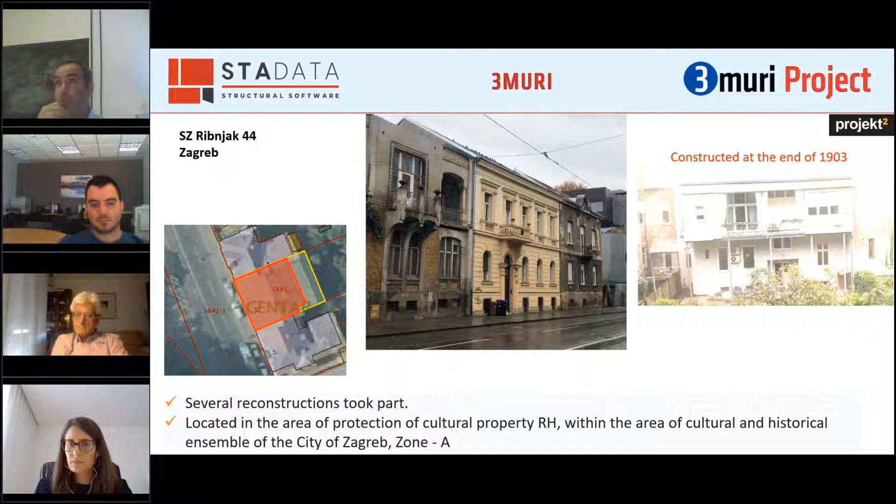The first picture shows the street facade, and the other picture shows the structure from the other side. What you can notice is that there were some reconstructions that took place, these being the steel columns that you can see in the picture.

This was very important because, as I already mentioned, there were several reconstructions and changes to the design of the building. We wanted to have the exact right geometry of the building in order for our model to be as realistic as the structure is.

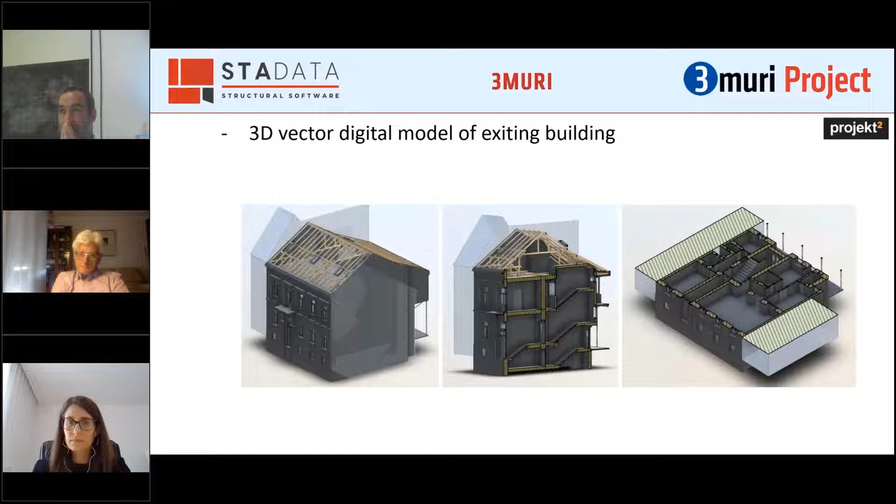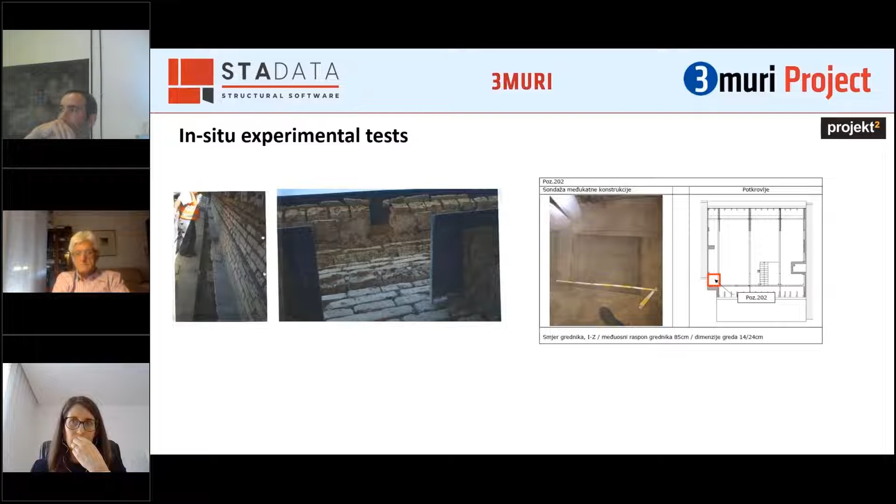As we know, masonry constructions can be made of various masonry elements, and in this specific case these were solid bricks. Also very important is the time of construction of the buildings, because we can connect this with the valid construction technical regulations of that time, and basically know what kind of design was done. During the in situ investigation, it was also necessary to determine the position and distance between the timber beams that were creating the slab of this structure.

The next step was a very detailed visual inspection and determination of the damage. This was done in high detail, and what we wanted to see was the direction of the cracks, the pattern of the cracks, the width of the cracks, because this was necessary so that when we did the modeling of the structure, we could compare whether we were getting similar damage as the building actually experienced after the earthquake that hit Zagreb in 2020.

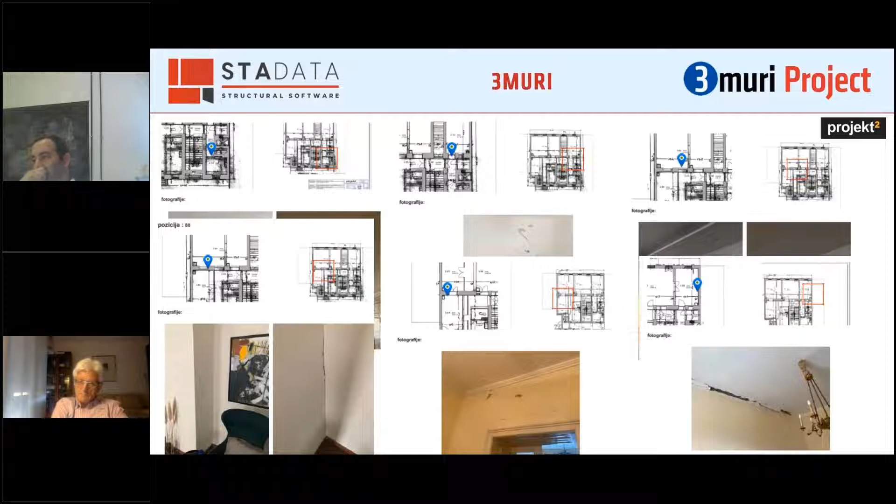Following this, a very detailed inspection marked all cracks on all levels. This is important because this structure was constructed in 1903, and the slabs were timber slabs, meaning we are dealing with flexible kind of slabs. So it was quite logical that the cracks at the connection of the walls and between the slab and the structural walls are a typical kind of damage for this kind of structure. We would say this was more than expected.

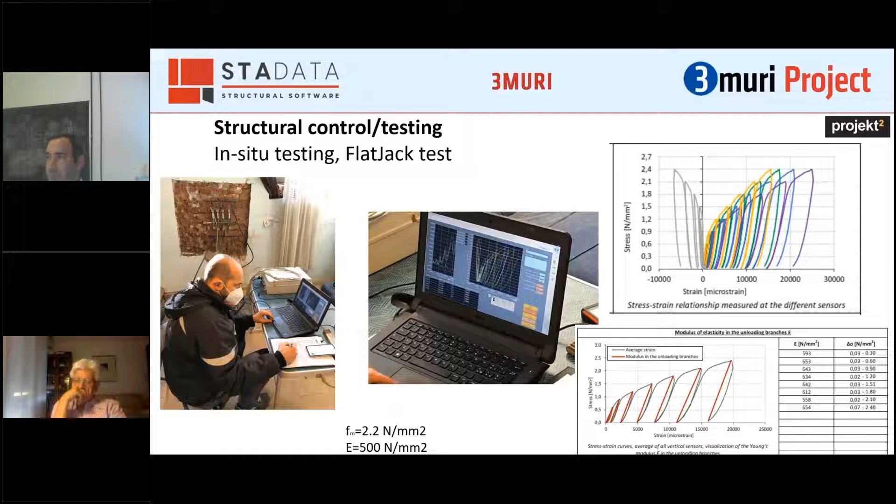The next step, for verification and validation of our model, was to determine the characteristics of the material. We conducted single and double flat jack tests, shown on this slide, to determine the compressive strength of masonry on one hand, and the modulus of elasticity on the other. The compressive strength of masonry is 2.2 megapascal, and the modulus of elasticity is only 500 megapascal. So we are dealing here with a very low quality of masonry.

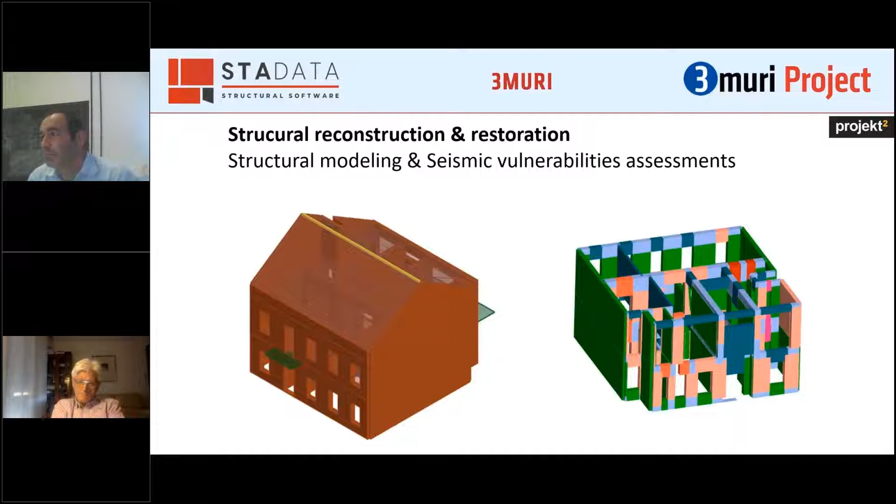So we chose 3Muri to conduct the numerical analysis and the seismic vulnerability assessment. You can see here the model conducted in 3Muri. First we conducted the modal analysis to determine the eigen frequency, which was very close to the result we obtained from the on-site investigation. This was the first thing that confirmed our model was done correctly. Then we conducted the pushover analysis in the X and Y directions, taking into account the PGA of the actual earthquake that hit Zagreb in 2020.

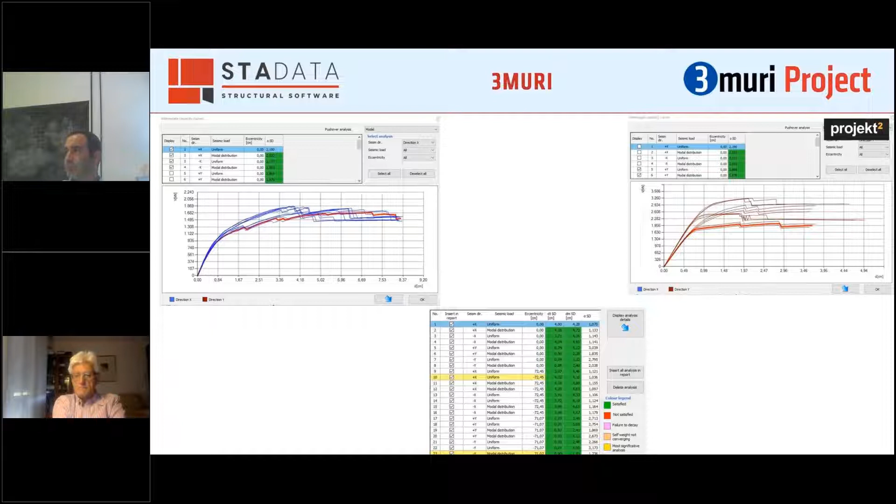However, we wanted to try and see what the results would be if we changed the strengthening method a bit. Again, we kept the FRCM and the steel frames, but we eliminated one of the steel frames from one of the walls.

What was interesting as well is that we said, let us change the slab and use concrete topping, even though we knew this should be prevented for the reconstruction of existing historical buildings, because the best solution would be to strengthen the structure with wooden planks and keep the behavior of the structure exposed to earthquake action as it was before.

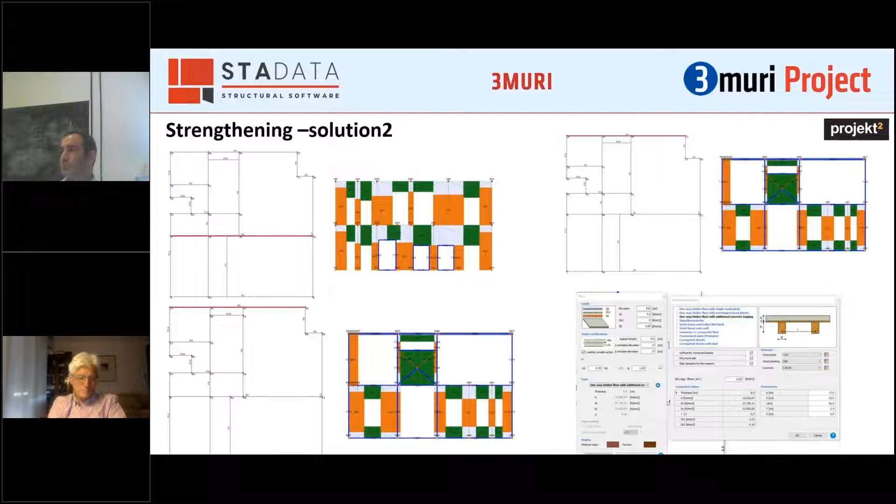So again, we conducted the pushover analysis in X and Y direction. In the lower part you can see that we wanted to compare and see how the implication of the strengthening method related to the original structure.

By comparing these two elements, we decided that the first solution was actually the better one, and that was our recommendation for strengthening the structure. We need to state that the strengthening was conducted for a return period corresponding to level 2 of the regulations.

At the moment, there are two projects being done: the project in Frankopanska Street and Georgicheva. The model is already conducted in 3Muri, and we will see what the next step will be. This is all from my side. Thank you very much for your attention.

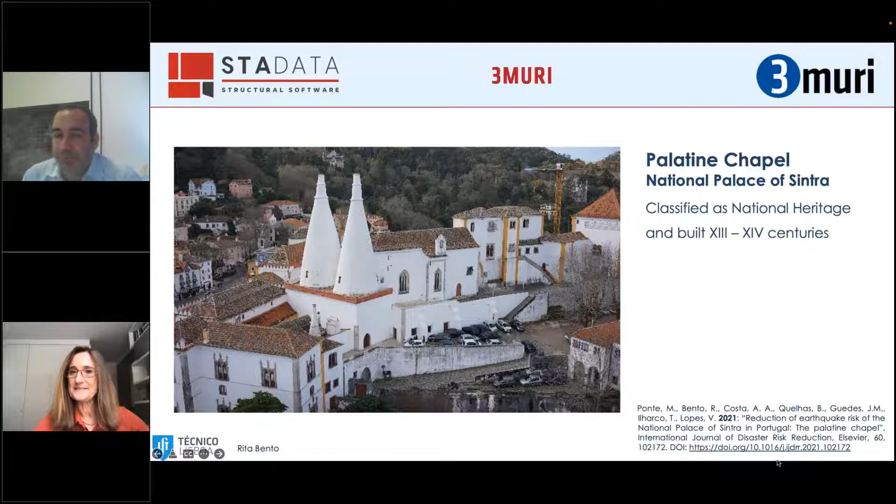I'm going to present this case study, the chapel from the National Palace of Sintra. The objective is to present an example of good practice in seismic risk reduction, comprising inspection and diagnosis, structural analysis, safety assessment, and the proposal of rehabilitation and strengthening interventions. These are basically the common main steps for the seismic assessment and retrofitting of this kind of structure.

The study starts with inspection and diagnosis, step number 1, through a visual inspection complemented with in situ tests. Then the results were used for construction and calibration of reliable numerical models, step number 2, as well as for the definition of rehabilitation actions. Then, after identifying the most vulnerable parts, step number 3, some strengthening techniques compatible with the building characteristics and importance are suggested.

So, starting with the description of my case study. It is a chapel. It presents a classic cross-plan shape composed of a nave, a transept, a choir and a chancel.

It was adapted along the years, and the main structural modification was the ampliation of this area, the presbytery area. We have here the main dimensions of the chapel from the plan side, but I'd like to highlight that the masonry walls are about 11 meters high.

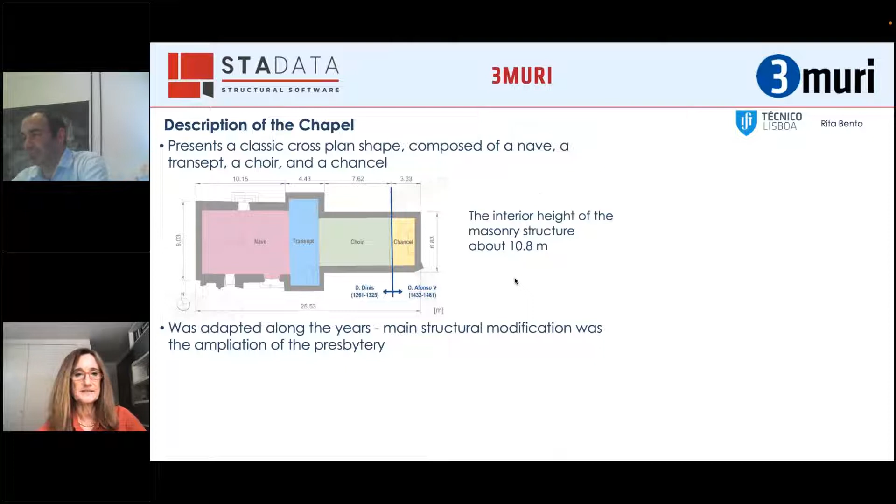So we have here some images of the interior of the wall. It contains mural paintings and a very delicate timber ceiling made of hardwood. The roof is of timber elements, supported on about 70 to 90 cm thick rubble stone masonry, with some stone works at the corners of the chapel.

You can see that there is a masonry arch which divides the space between the choir and the chancel, and it supports the ceiling of this latter space.

You can see that from the beginning there are, in fact, two different types. You can see from the image steel tie rods that were introduced in order to somehow avoid out-of-plane behavior of the walls. So looking now to the type of roof and the timber structures that you have, this figure presents the

structural configuration of the two main timber trusses that were supporting the ceiling and the roof of the nave. This is truss A1, and you can see this type of truss in the nave and transept, but in the choir and chancel you have the other type of truss, A3, with a different configuration, introduced later on. It was not in the chapel from the beginning.

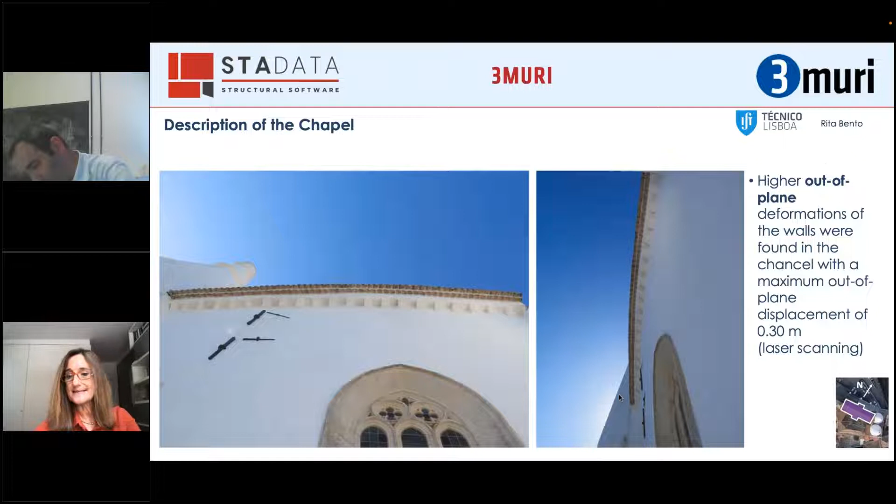In terms of inspection and diagnosis, we have performed different types of tests. In fact, we have two teams working in the chapel: IST from my university, so my team from University of Lisbon, and NCREP. NCREP is a private company, and for the chapel, it works together with the conservation and restoration team.

So my team has done tests for the geometrical characterization, laser scanning, and we have also support with the UAV. We have performed ground penetration radar tests, masonry sample collection, flat jack tests, and ambient vibration tests. And the NCREP team has been working with the timber structural elements characterization and study of the roof.

And the work done included the opening of survey windows from the outside, as you can see here, but also from the inside of the chapel.

So the geometrical survey, as I mentioned, of the entire chapel was performed using our equipment, with the laser scanner survey, with which it was possible to get a very impressive and important 3D definition of the geometry of the structure. As an example, we have here on the right side the accurate geometry that you can obtain with this, which was very important for the definition of the geometric model.

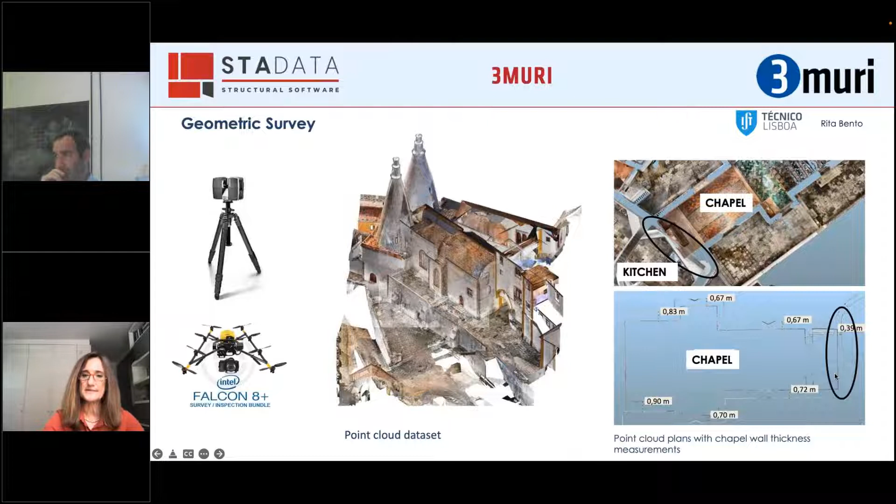Just see, for instance, the wall which is the connection between the chapel and the kitchen. It has a thickness which varies along its width, and this was only possible to get with this type of survey. So with the point cloud dataset, we also...

developed an HBIM model where we include all the information that we obtained for the chapel, not only from the inspection but also from the numerical studies. With this, we can very easily get horizontal and vertical sections, which will be very useful, mainly in future interventions of the chapel.

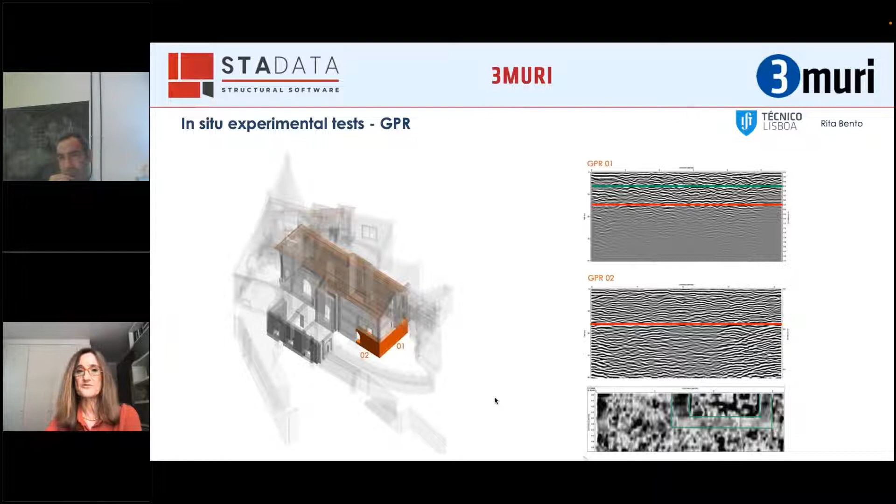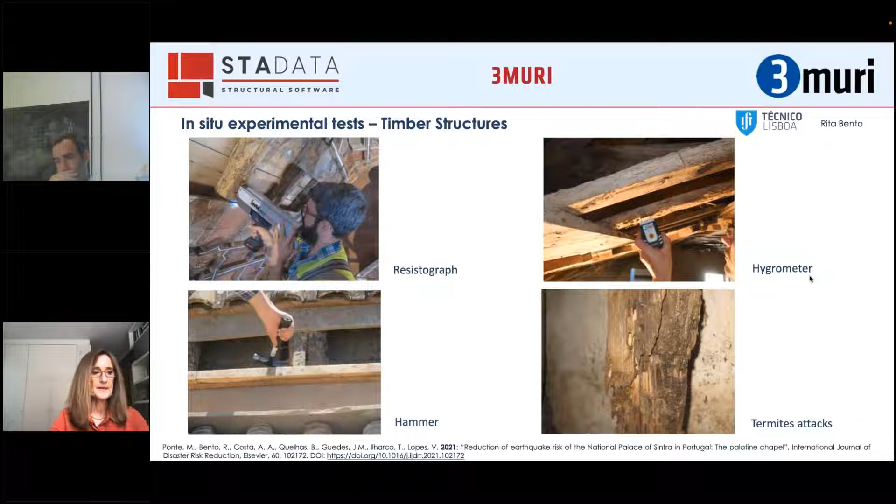This is the type of work that had been developed for the characterization of the timber structure. Non-destructive equipment was used, as you can see from these images, and it was possible to conclude that the major damage on the timber elements were related to termite attacks. The identification of the type and location of these attacks was fundamental for the definition of the final retrofitting of the ceiling and the roof.

Moving now to the seismic performance assessment. It was developed with 3Muri, in which the in-plane and out-of-plane behavior were studied through nonlinear analysis. The chapel is this structure in the middle. It was very important to account for the boundary conditions of this case study.

The calibration of the model based on dynamic characteristics identified with the in situ ambient vibration tests was one of the most difficult tasks for the seismic assessment of the chapel. To obtain the correct dynamic characteristics, it was necessary to model the total adjacent buildings. We started with some parts of the adjacent buildings, but it was not possible to accomplish the dynamic characterizations obtained in situ. So it was really challenging to get the final numerical modeling.

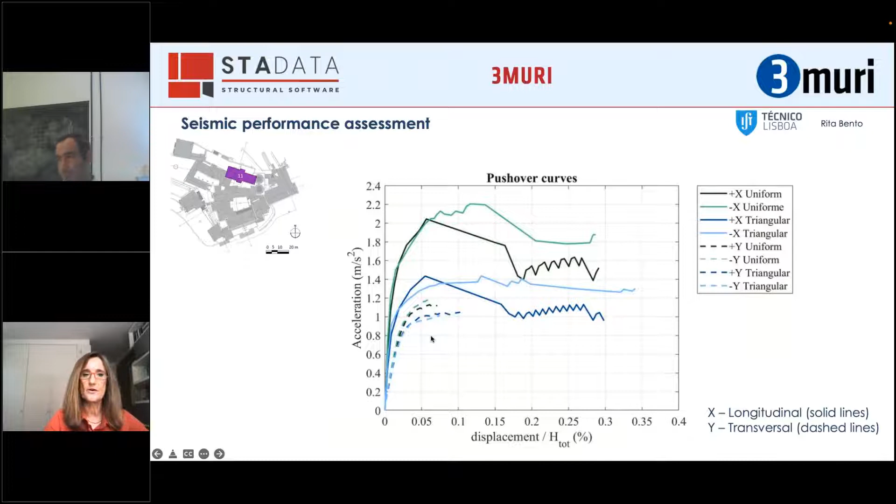So for this longitudinal direction, the effect of the other buildings was very important. For the transversal direction, it was not like this, and you can see for the y direction a completely different behavior, with much lower values of maximum capacity in terms of shear, maximum resistance, and much smaller capacity of deformation of the structure.

After performing and obtaining these pushover curves, the safety assessment of the in-plane behavior of the chapel was carried out following the recommendations of Part 1 and Part 3 of Eurocode 8, and of course the Portuguese National Annex, and we realized that the safety was not satisfied in terms of the global behavior of the chapel.

For the out-of-plane behavior, we considered nonlinear kinematic analysis performed according to the macro block modeling approach, using a tool in the 3Muri program. Here it represents all the mechanisms studied, a total of 8 different mechanisms for this case study.

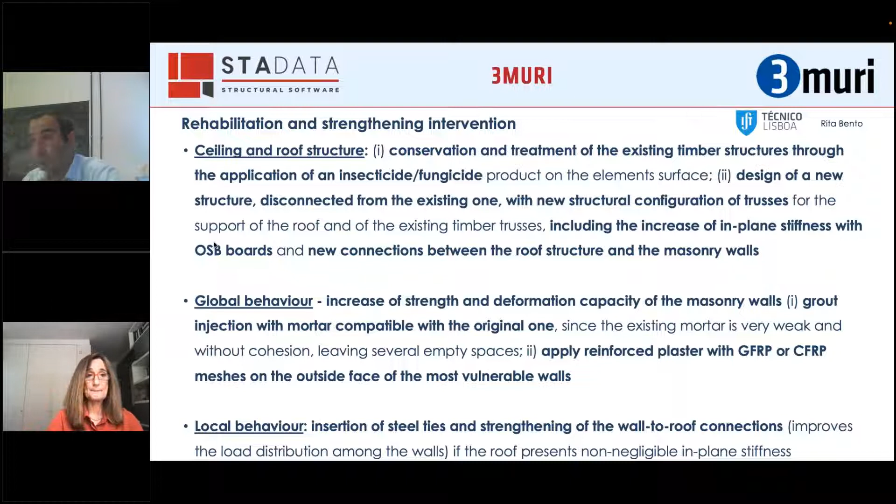Based on these results, some different rehabilitation and strengthening interventions have been proposed for the chapel, for the ceiling and roof structures, considering different types of solutions, such as applying insecticide or fungicide on the timber structures that have been attacked by these termites.

We have also considered some new structures disconnected from the existing one in order to improve the behavior of the roof, including some OSB boards to increase the in-plane stiffness of these structures, and new connections between the roof structures and masonry walls, which are rather important also to improve the local behavior of the chapel.

For the global behavior, in order to increase the strength and deformation capacity of the walls, we proposed grout injection with mortar, which has to be compatible with the original one. In some of the walls, we also proposed applying reinforced plaster with FRP meshes, only from the outside of the walls due to the very rich interior of the chapel, applied on the most vulnerable walls.

For local behavior, besides improving the connections between the roof and the masonry, some new steel ties were also proposed. So let's start very briefly with the intervention of the roof structure.

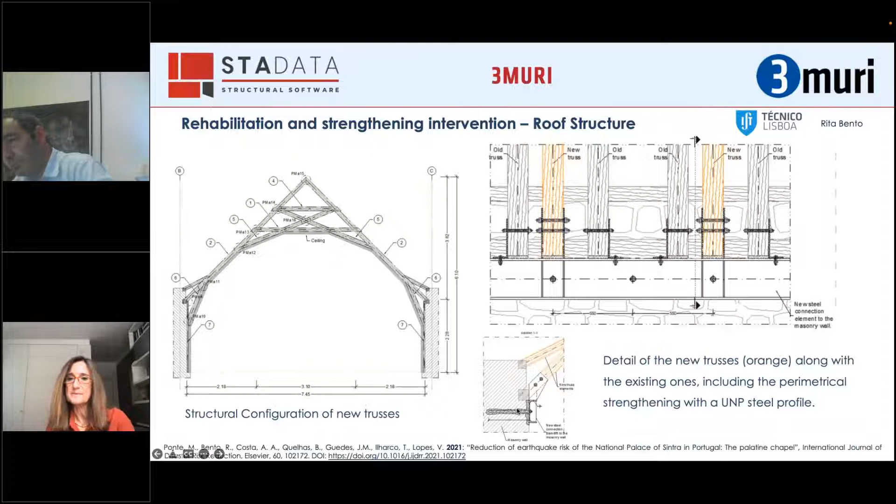So what was proposed is to have some new trusses, identified in orange in this plan view, along with the existing ones, and this is the configuration of the new trusses proposed for this retrofitting. You can see how these new trusses are connected with masonry, using this UNP steel profile in order to improve the connection with the masonry walls.

But of course, to have a reliable numerical model with this retrofitted masonry, it was necessary to understand how these solutions would improve the strength capacity and deformation capacity of the wall. We had no information about that.

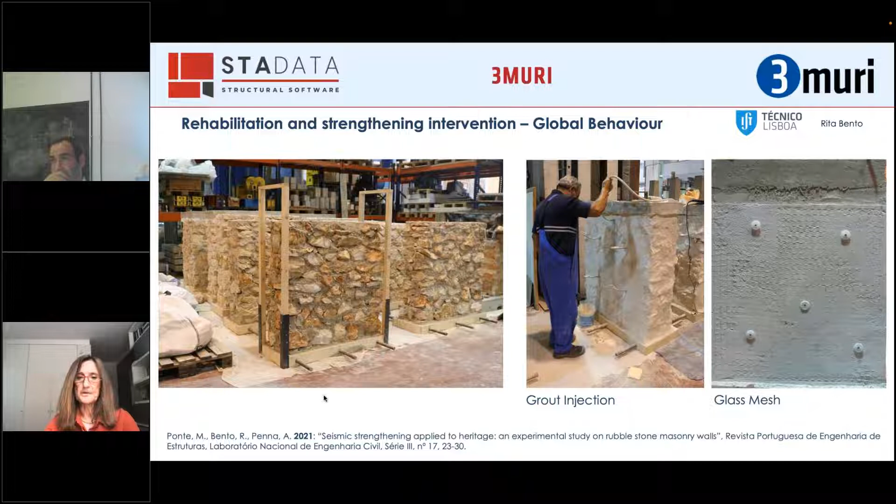So we decided to do laboratory tests for different types of retrofitting - only with grout injection, and different types of meshes, or only meshes - and we obtained results that we then used in our numerical modeling. The results of these preliminary laboratory tests have already been published, and we hope very soon to have another publication with much more results of this study.

Basically that's all - just to highlight the importance of these studies, the importance of the first step related to inspection and diagnosis activities, crucial for then calibrating our numerical models. These, together with the structural safety assessment, are the only way you can identify the most vulnerable parts of the structure, and then propose the rehabilitation and strengthening intervention.

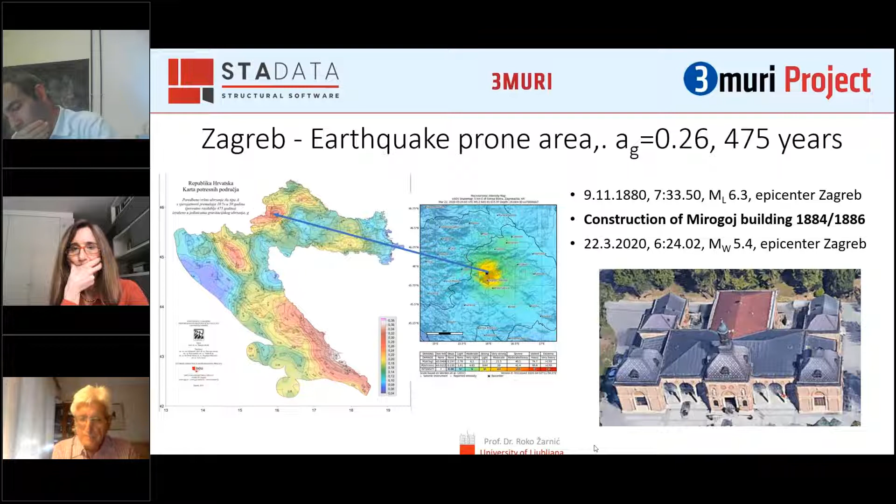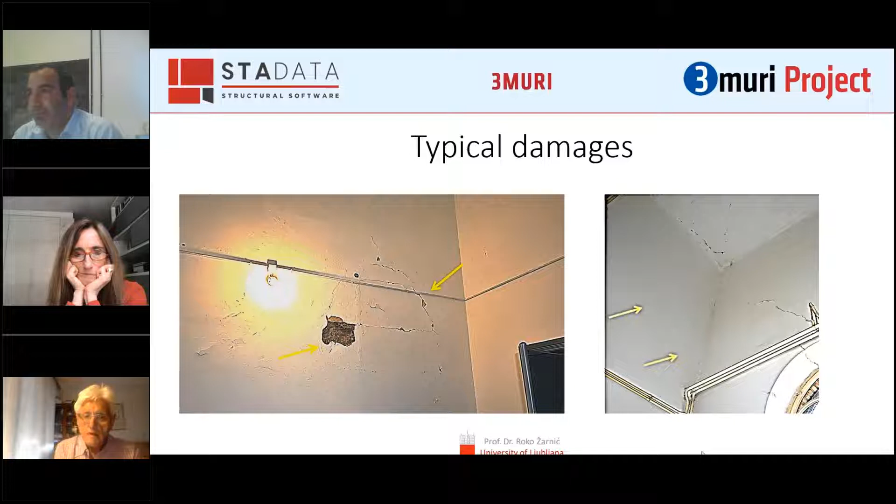We also have the digital survey of this building, but very, very good documentation from the original building exists: 1886 documentation, and also the design of enlargement in 1913 were available, as well as the last one from 1993, which was a very radical strengthening by putting in reinforced concrete slabs. Very, very good architectural drawings were available, so we could make a model just based on this data.

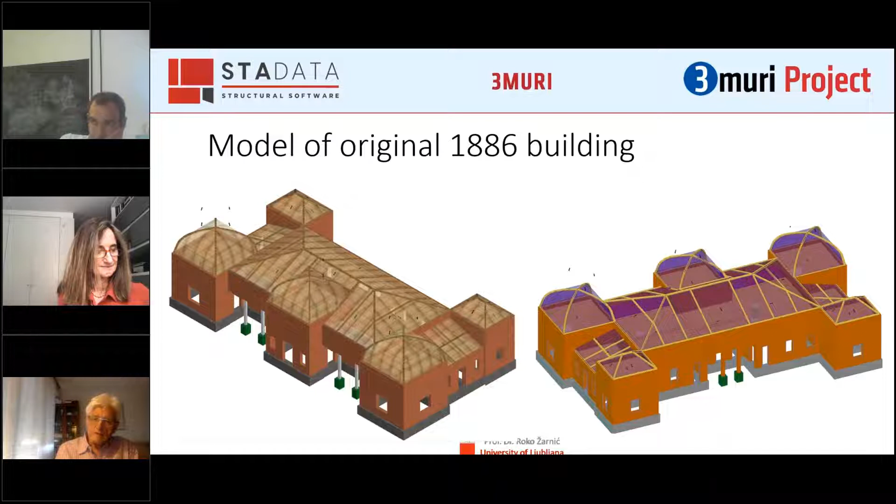After the First World War, they added the part you see in a different color, and that is today's current situation with reinforced concrete slabs and beams. But we are also going to make an intermediate system analysis where the configuration of walls is the same, but with only wooden floors. So we'll have actually three models, plus one from 1934, where they removed some walls and then added them again. It's quite an interesting game to play with.

Currently, I cannot show you the results because the site investigations are in progress. But from the first information, the masonry used in 1886 was of far higher quality than the one added 30-40 years later. That's why I didn't want to make any calculation yet, because there's such a big difference — we have to find it out, and next time I hope I can deliver you more information. But okay, what we learned from this: some challenges.

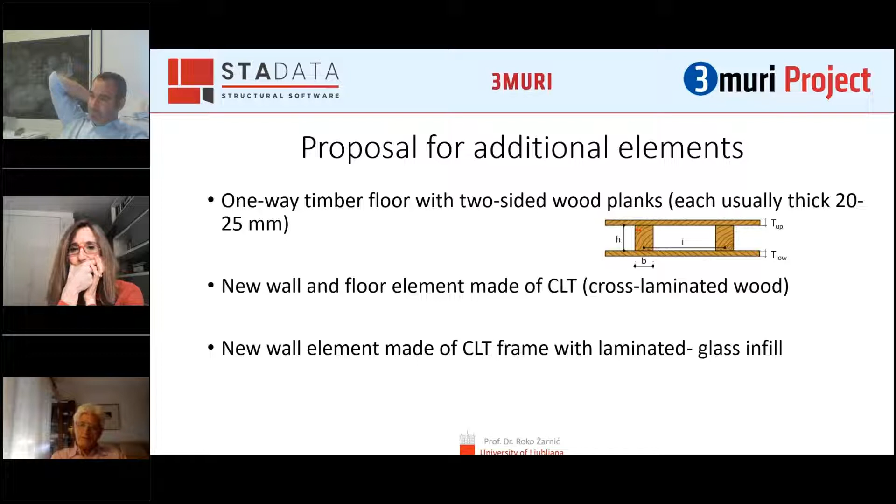These two systems could be very well used, especially when you need to replace inner partition walls and are limited in dimension. Why? We found that 3-ply CLT, typically 10 centimeters, has the load-bearing capacity of a quite good masonry wall of 30 or even more centimeters. Technically it's very easy, and if needed I have quite a lot of data. We did testing for 15 years on this.

So in this reference, some things are referred to, and I would be happy if we can work on this. The recent one was published last year, in 2020. It's an element which can be very useful when we need to open some part in a facade but keep it load bearing, since the envelopes and hysteretic curves are very similar to those of masonry, but with much higher ductility. I think it could be worthwhile to think about this initiative.

I was talking with Sergio Lagomarsino, because we've been together on one of the EU projects, Perpetuate. He said he would come to me with this - I'm waiting for him. It could be especially useful in Zagreb, where there are many buildings in the city center with damaged partition walls. People are not happy to have some structural thing from the basement up, but they could accept something like CLT. So maybe in future this could be a challenge.

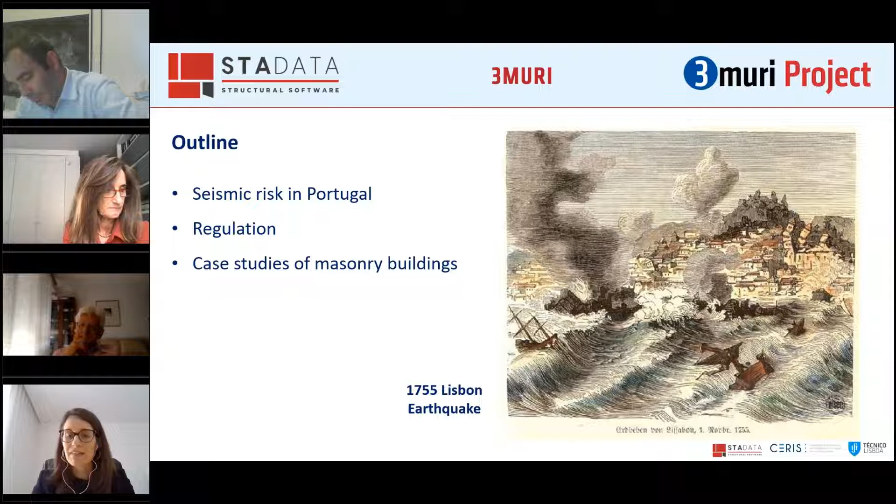So when we combine Portugal and earthquakes, one of the first ideas that comes to mind is the 1755 Lisbon earthquake, because it completely destroyed the city of Lisbon, not only because of the earthquake itself, but because of the tsunami and the fire that spread through the city just afterwards.

So when we talk about seismic risk in Portugal or in any other location, we have to consider three components: seismic hazard, exposure, and vulnerability.

I'm going to briefly talk about some of the most important seismic events in Portugal. Again, the 1755 earthquake in Lisbon that also affected the south area of Portugal, the area of Algarve, as well as the north of Africa. This seismic event is considered as reference for the definition of the offshore seismic event according to our regulation.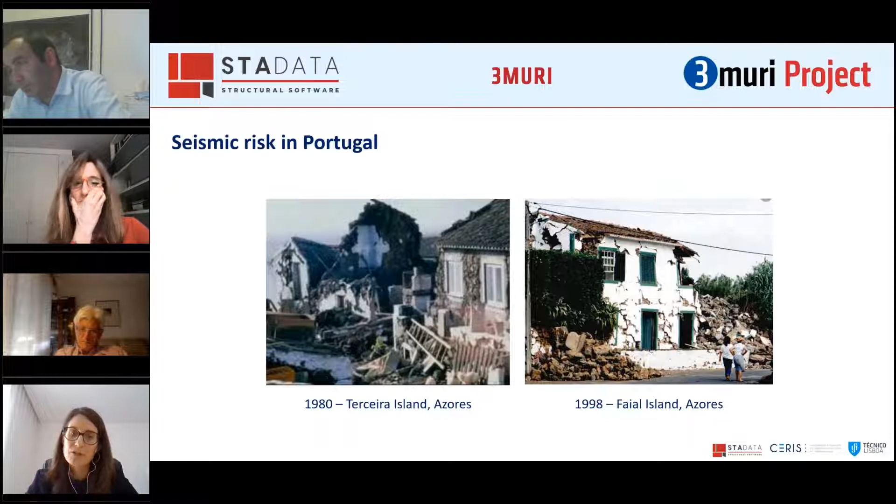And of course, talking about earthquakes in Portugal, we have to also emphasize the earthquakes that happened in Azores: the one in 1980 in Terceira Island, and this one in 1998 in Faial and Pico Island, with many damages on masonry buildings.

Finally, I could not finish this part without referring to this series of seismic events that are happening in Azores right now, since March until now. So many seismic events, some of them felt by the population. There was also the threat of a volcanic eruption. In terms of damage, the records are not significant, but it's just part of our daily news right now, even though things are much calmer at this moment.

Talking about mainland Portugal again, there are many studies that were developed to assess the seismic risk of the building stock in Portugal. This study from Silva et al. was developed in 2015.

There were some estimations of what would be the direct economic losses if an earthquake with a return period of 475 years would occur. It was estimated that the direct economic losses would be about 32% of the GDP from Portugal, dating from 2011. It was highlighted as well that the main critical areas were the region of Lisbon and the south of Portugal in the area of Algarve.

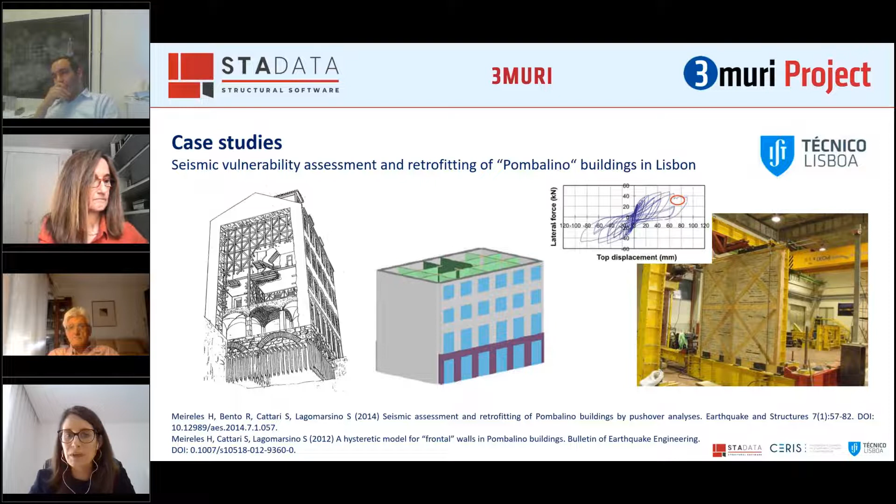This truss timber structure was then infilled with masonry. During the PhD work, a very significant experimental campaign was developed exactly to characterize the behavior of this type of wall. A macro element model was also developed for modeling this type of wall in Tremuri, but in the research version of Tremuri. This was then used for the global model and analysis of this Pombalino building that was taken as reference.

What I can refer now is that we are at the moment developing some work in order to define which parameters can be considered for the modeling of this type of wall, these Pombalino frontal walls, but using Tremuri in the commercial version. We are calibrating the parameters based on the experimental results, and we are going to publish these results at the end of this year for a conference that will be held in LNEC in Lisbon. So something to watch.

Another case study is the work that I developed during my research for my PhD thesis, together with Professor Rita Bento, Professor Sérgio Lagomarsino, Professor Serena Cattari, and Professor Paulo Lourenço. This work addressed the seismic behavior of Gaioleiro buildings, also in Lisbon.

These buildings were built after the Pombalino period of construction, and these buildings have, in general, a worse behavior in terms of seismic performance. That's why we found it important to address them and see effectively their behavior. A lot of work was done in terms of the global behavior of the buildings, also using Tremuri, the local behavior of the walls, and also in terms of analysis of uncertainties, aleatory and epistemic. The final aim was the definition of fragility curves for this specific typology of buildings.

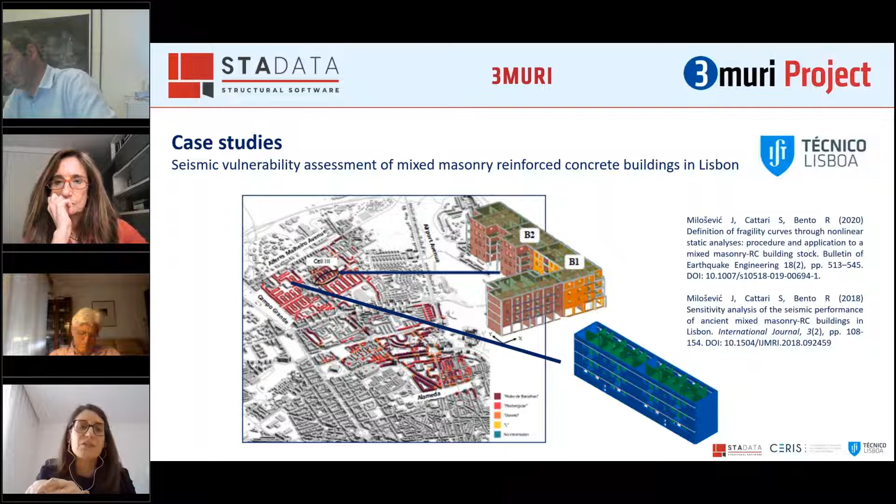Now I'd like to bring case studies from other universities. I know I'm already over time, but I'd like to highlight this work developed at the University of Aveiro, addressing the seismic assessment of masonry buildings in Faro, a city in the south of Portugal with high seismic hazard and risk. This work is very interesting because it addresses the behavior of masonry buildings considering the effect of the aggregate, which is one of the research gaps under a lot of development right now. It's a very interesting work, and again, it was developed with Tremuri.

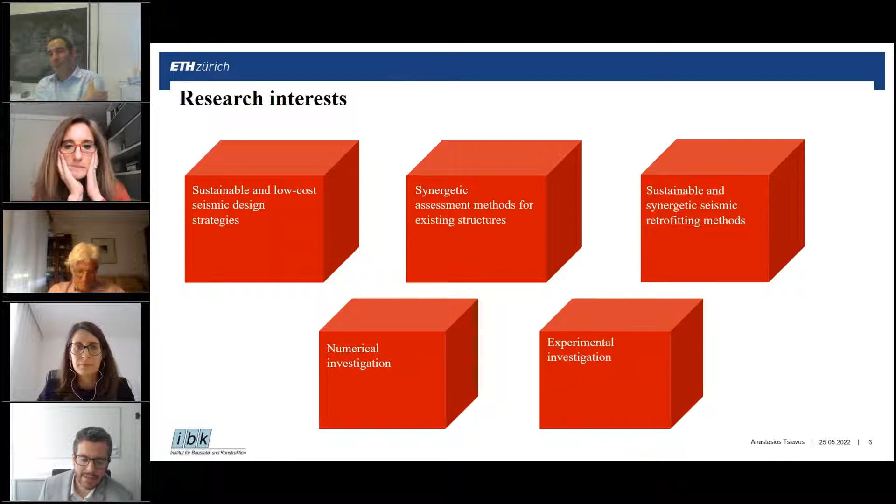A little bit about my research interests - they're based on five pillars. The first is sustainable and low-cost seismic design strategies. The second is synergetic assessment methods for existing structures. The third is sustainable and synergetic seismic retrofitting methods. I investigate these topics using numerical methodologies, numerical approaches, and large-scale experimental investigation.

One part of my research focuses on seismic isolation of structures. One problem is that the high installation cost and resource-demanding construction process inhibit the application of existing seismic isolation methods to a wide range of countries and buildings worldwide. Therefore, the question is: could we reduce this cost by using low-cost seismic isolation methods that use only materials that are locally available or can be easily sourced?

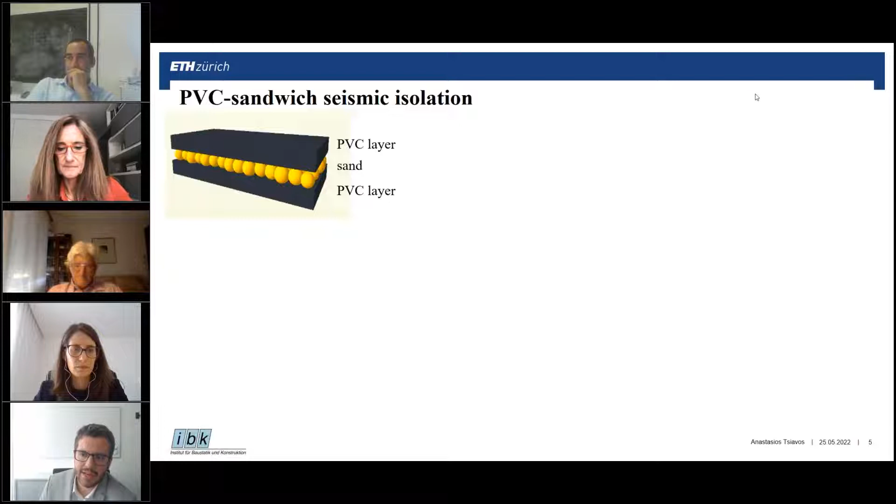Based on that, during my research at the University of Bristol, we developed a new low-cost seismic isolation strategy called PVC Sandwich. It's basically based on a very thin layer of sand sandwiched between two PVC layers. This configuration, this encapsulation of a very thin layer of sand particles, creates a rolling behavior of the sand particles, and this rolling behavior leads to an attractively low friction coefficient that enables structures to slide at a seismic intensity acceleration a little bit lower than 0.2 G.

You see here the relevant experiments at the University of Bristol. A little bit about this isolation: we tested a steel structure first on the 3x3 shaking table of University of Bristol, and when the friction coefficient is exceeded by the seismic intensity of the ground motion record, what we observe is a substantial sliding of the structure with respect to the bottom due to the rolling behavior of the sand grains.

We continued that research and expanded it to masonry structures. What we developed there is a low-cost hybrid seismic design solution, which is based on the activation of different seismic response mechanisms for different seismic hazard levels that our structures are exposed to. What we propose there is to...

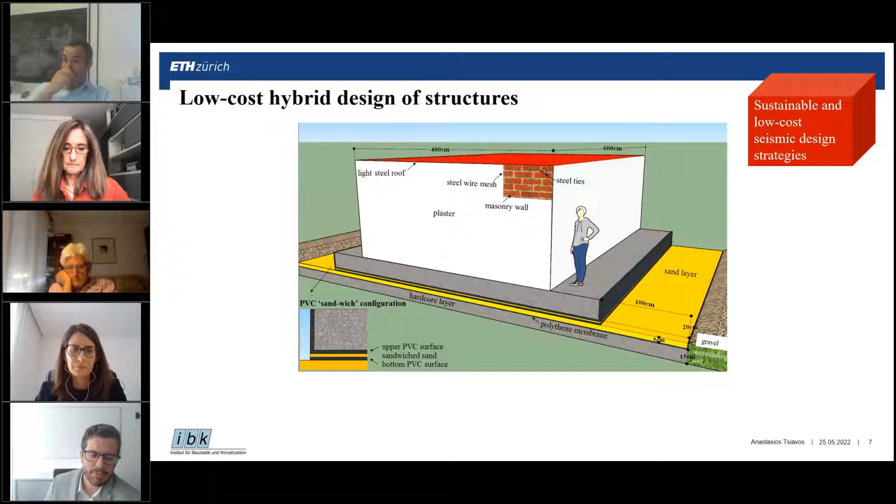Protect the existing masonry building for the design hazard level using steel ties or steel wire mesh that prevent the out-of-plane failure and increase the strength capacity of the structure. Then for motions that exceed the seismic design hazard level, we propose the sliding fuse mechanism, a second response mechanism that enables sliding of the bottom of the structure with respect to the foundation due to this sandwich sand layer. This combined mechanism leads to a seismic protection strategy for various seismic design hazard levels.

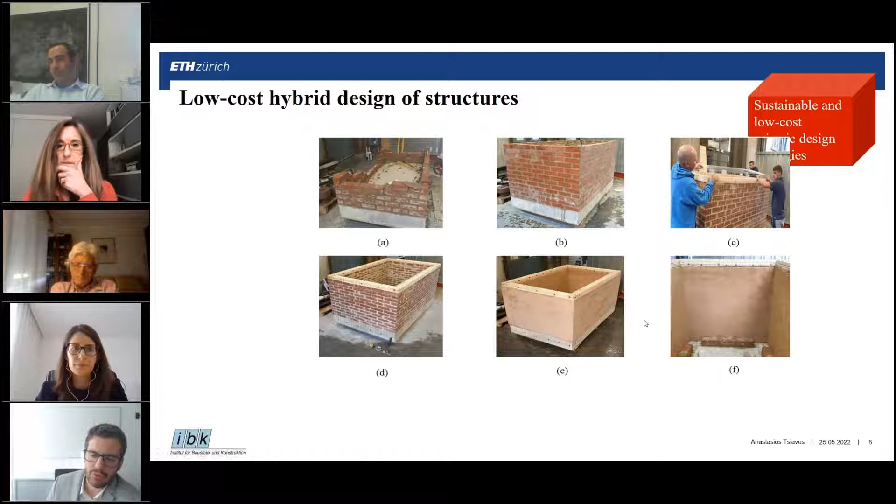You see the application of this technique on an existing masonry structure: the attachment of the steel mesh to the bottom and top of the masonry wall, the steel ties, and the test that we did on the masonry structure. You see here a large-scale test at the University of Bristol, and the response for high amplitude of accelerations is basically a sliding response due to this rolling behavior of the sand grains.

Apart from that, a very major part of my current research focuses on the synergetic assessment and retrofitting strategies for existing buildings. What is the motivation behind this work? Many buildings in Europe and worldwide do not comply with modern seismic code provisions and are at the same time energy deficient.

The investment required for the retrofitting of these buildings cannot be easily justified in many cases based on the benefit obtained through the seismic risk reduction of these buildings, and several seismic design and retrofit solutions are characterized by substantial cost and high carbon emissions. So what we think is that there is a need for a holistic and synergetic approach in the design, assessment, and retrofitting of structures, considering their seismic behavior, their energy performance, and their carbon footprint.

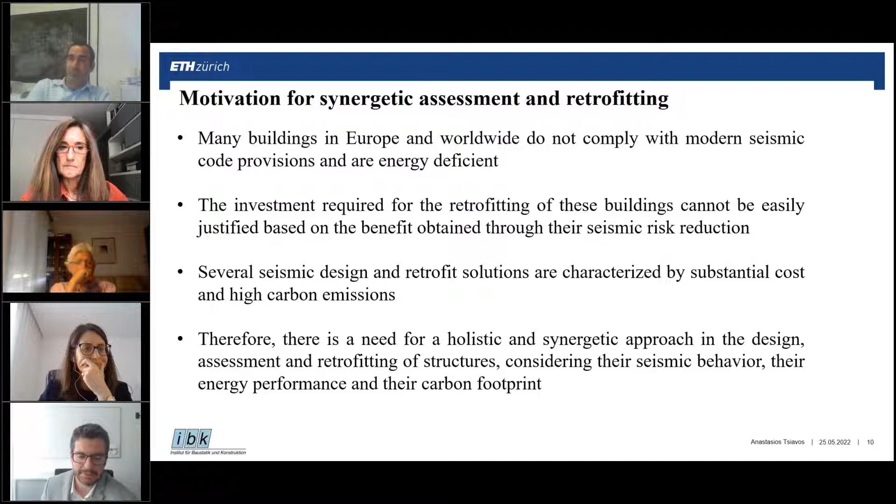What we proposed is first a holistic assessment tool that categorizes the behavior of the structure in three different aspects. The first is the compliance factor, currently implemented in the Swiss code provisions for the assessment of existing buildings. It's a ratio of the seismic capacity of an existing structure over the seismic demand that would be needed for the design of a new structure in the same location. When we deal with existing structures, we talk about values of this ratio lower than 1, and based on these values we can categorize the behavior of the building into several classes that you see over here. This is one aspect of our assessment tool.

The second aspect is the energy performance of the existing structure. There we divide the U value of an existing structure by the U value for a new structure, and we propose a similar categorization with respect to the corresponding energy performance of a new structure. We can see how our structure compares with respect to the U value and the heating demand of the structure.

And the last pillar of this assessment tool is the embodied carbon emissions, basically the retrofitting or assessment technique, where we can assess what is the environmental impact of our retrofitting with respect to the CO2 equivalent per square meter.

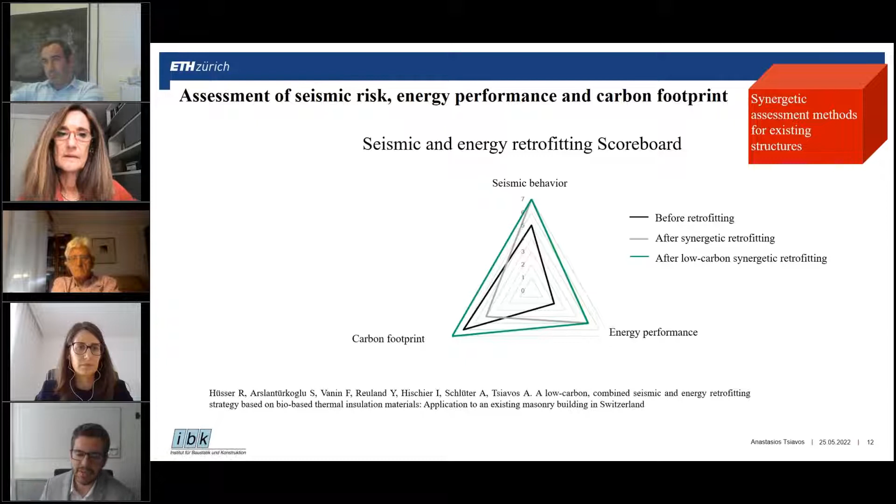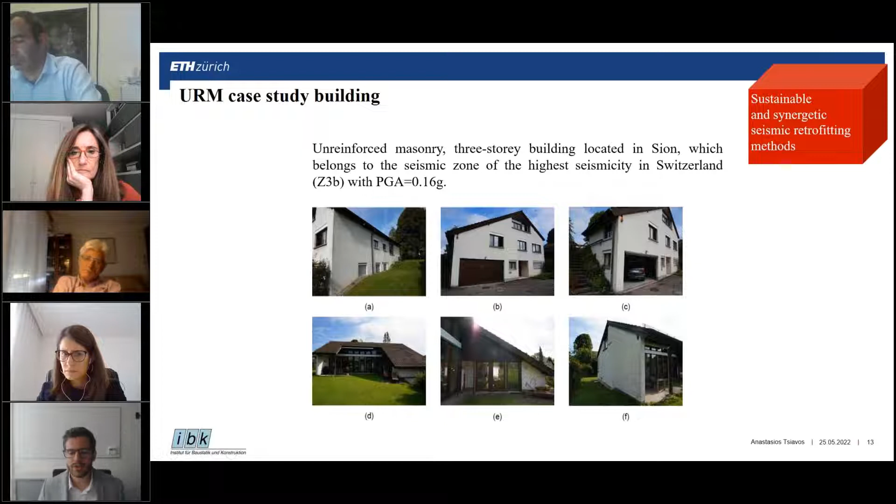So what we try to do is simulate the behavior of a URM, unreinforced masonry case study building in Switzerland, located in Sion with the highest seismicity. You see the building over here. It is a building that is seismically vulnerable, a three-story building with weak floors, timber floors. What we try to do is simulate this building with Tremuri.

We found these base shear values for different horizontal displacements. And of course, we illustrate here the first shear failure on this wall, based on the concentration of stress in this wall due to the weak diaphragm function of the building.

So in order to improve the efficiency of the building, we propose solutions that can lead to improvement of the current behavior. What we propose here is a solution based on increased diaphragm retrofitting of the building, with a low carbon concrete addition on top that you see here. A 6 centimeter thick concrete layer is added. The concrete is defined as low carbon because it consists of granulates from demolished buildings and recycled steel.

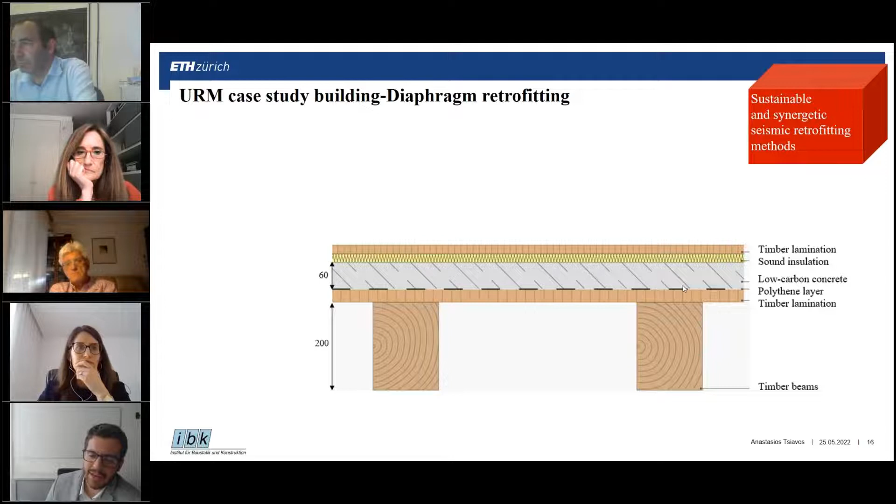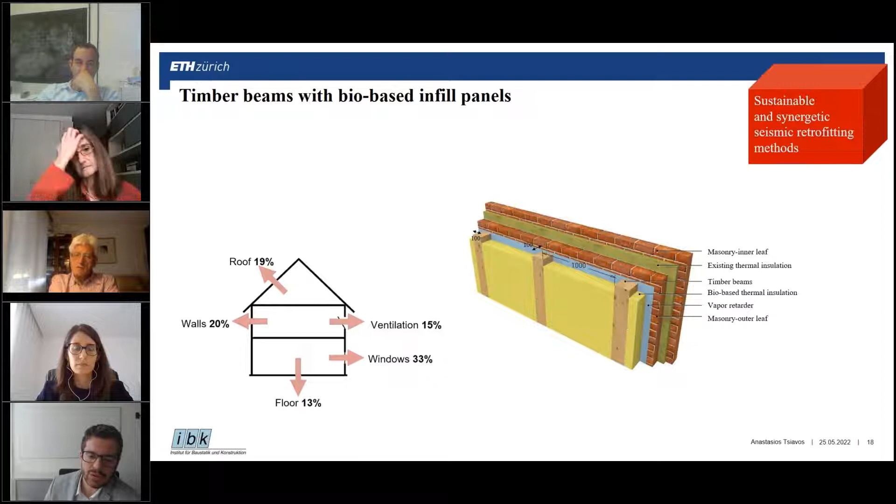The second solution we proposed emerges from the fact that a large part of the energy behavior of the building depends on the walls and heating losses due to poor energy performance of the walls. What we try to do is propose a novel solution with timber beams infilled with bio-based materials, bio-based panels. We tried several bio-based solutions such as natural grass panels, combining this by attaching timber beams to the facade of an existing masonry building. We infilled these timber beams with bio-based thermal insulation materials with attractive thermal insulation properties and low carbon footprint, and tried to measure the result.

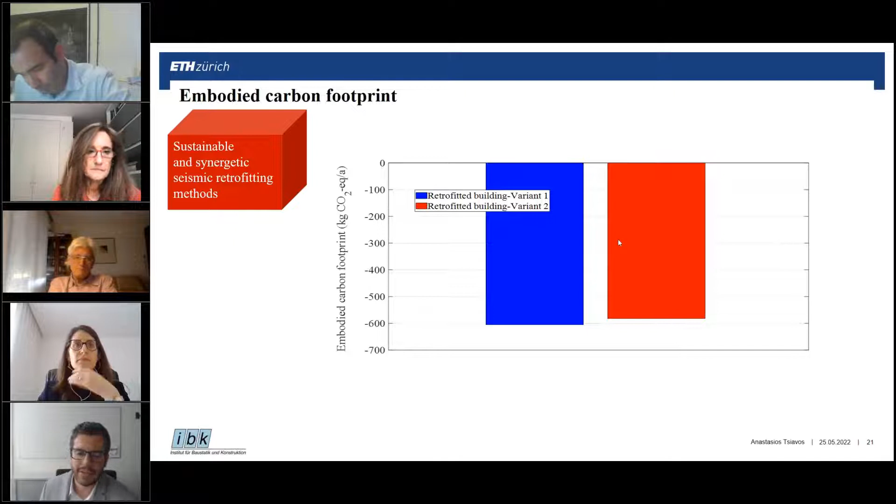We found that by doing this, we managed to reduce the heating demand, and therefore the annual operational carbon emissions of the building substantially due to the use of bio-based insulation, more than 20%, as you see here, with both retrofitting variants. At the same time, due to the use of bio-based materials, we can achieve negative carbon footprint values. You see here the negative carbon footprint values for the two variants, creating an attractive behavior in terms of environmental impact.

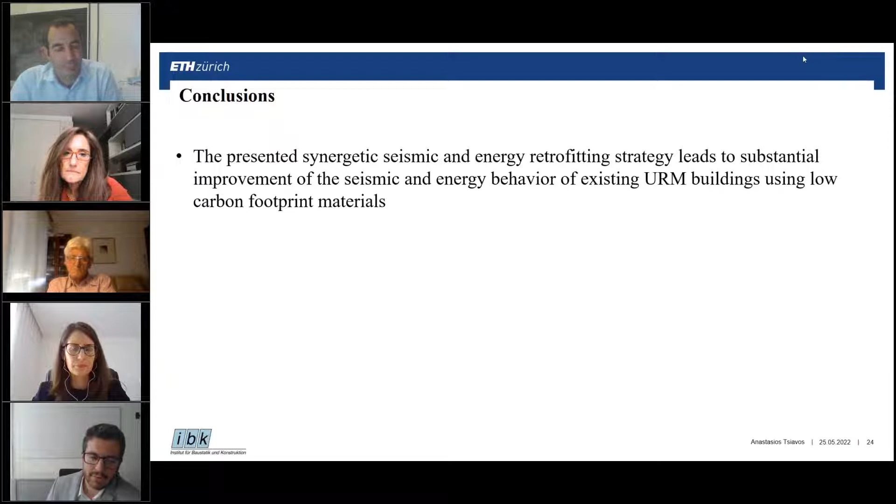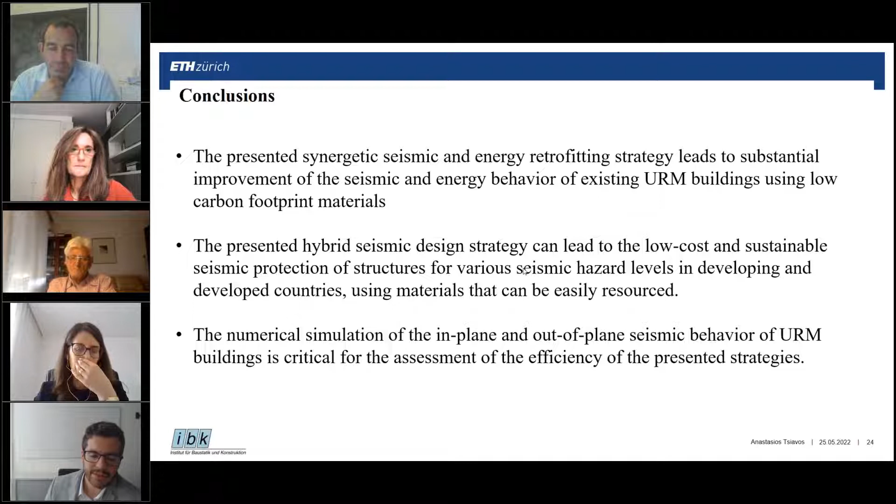So what are the conclusions of this work? Basically, what we presented here is a synergetic seismic and energy retrofitting strategy that leads to substantial improvement of the seismic and energy behavior of existing URM buildings using low carbon footprint materials. We presented a hybrid seismic design strategy that can lead to low cost and sustainable seismic protection of structures for various seismic hazard levels in developing and developed countries using materials that can be easily resourced. This numerical simulation is the challenge: in-plane and out-of-plane seismic behavior of URM buildings, critical for the assessment of the efficiency of the presented strategies. Tremuri was very efficient in capturing this in-plane and out-of-plane behavior, using the timber beams and the different diaphragm retrofitting strategies that I presented.

And as the end, my vision for civil engineering focuses on the development of performance objectives for our community subjected to climate change. There is also the energy crisis at the moment, deterioration processes, and natural hazards—what we expect the people, the infrastructure and the economy to endure. Within this frame, the development of sustainable design, assessment, and retrofitting strategies based on the state-of-the-art of engineering practices and computational techniques lays the foundation for the implementation of this multi-performance synergetic research approach. Along this line, my research aims to offer a new multi-performance and synergetic assessment and maintenance paradigm towards the development of sustainable and resilient communities.

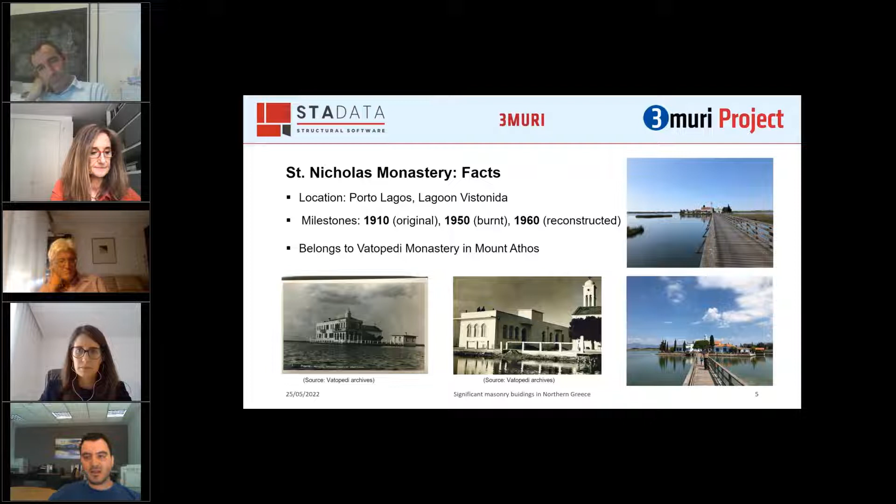Our scope of work in our office was to design the one-story building in 3muri and to propose if it was possible to add the second story and the roof from the original design, and to make some changes to the original plan of the ground floor.

The next project I'm going to talk about is the Karolou Diehl block of flats, located at the corner of Mitropoleos Street and Karolou Diehl in Thessaloniki. It was built in 1924 as a two-story building, and the rest of the floors were added in 1938. The project we designed in our office was a private project, the reconstruction of an apartment located on the second floor of the building.

The scope of our work was to check, in conjunction with the architect, if the demands of the client could be met — he wanted some openings, some strengthened bearing elements, and so on. We tried to see if his demands could be met.

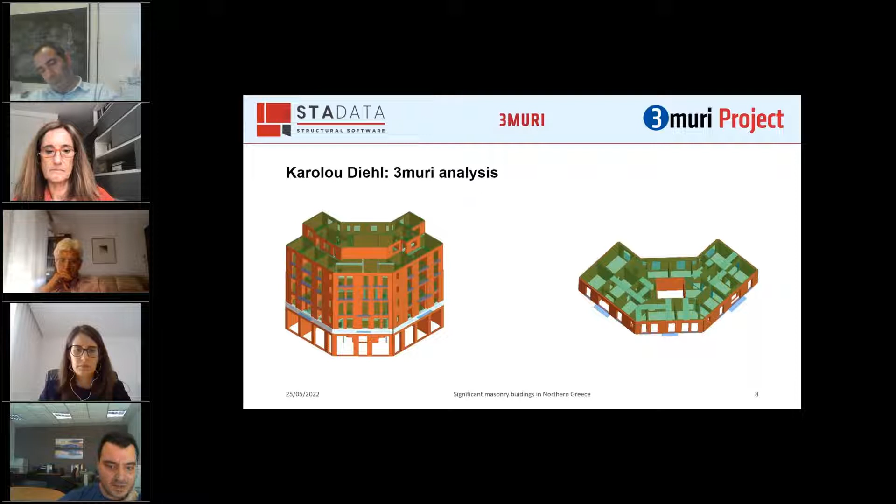Due to this, we had to redesign the whole building and implement it in 3muri. As you can see, it is a very demanding building, not only geometrically, but also because of its history — it was built at different times, so many different materials and classes were used. Luckily, thanks to the techniques that 3muri offers, we managed to meet the demands of the client.

The last project I'm going to show you is also the most iconic one, which is why I kept it for the end. It's called the Roosevelt Building, located at Eleftherias Square in Thessaloniki. It was built during 1926 and 1927, and originally belonged to the Ionian Bank Limited. It is a very iconic building for Thessaloniki, and its use changed over the years.

During the war, it was used as the headquarters of the army, and after that the Ionian Bank was absorbed by Alpha Bank. Very recently, the whole building was acquired by an individual, so I cannot reveal more about its future use, as it is the wish of the customer.

The scope of our work was to model and analyze the whole building and propose a retrofitting program. The work is still in progress. The building in itself is very complex, not only because of its geometry, but also because of the large number of materials that were used.

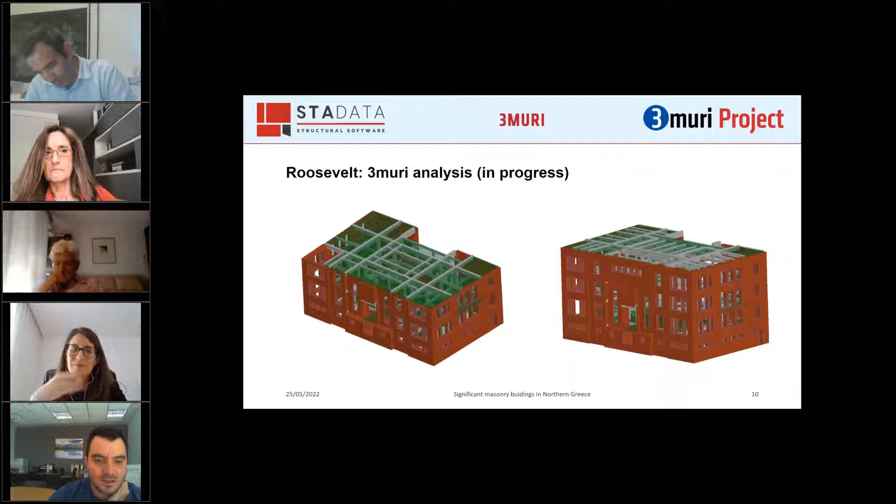So to conclude, I would also like to mention that all three projects that I've shown earlier were subjected to earthquakes during their history, some minor, some major. But what is worth mentioning is that their pathology is very, very limited. This makes us wonder about the capabilities of masonry, stone masonry, masonry walls. And that is because the research that the universities carry out is still ongoing and very interesting.

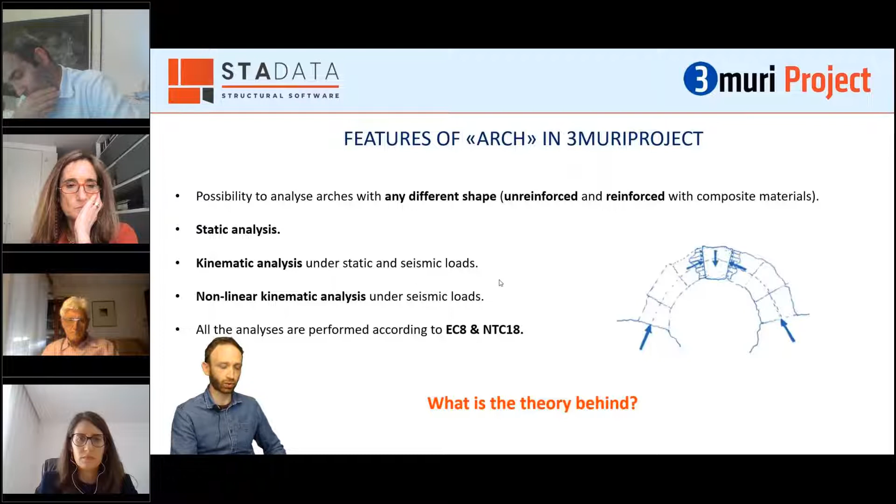Concerning seismic loads, a nonlinear kinematic analysis is also available, which gives the user the evolution of the collapse mechanism. I want to highlight that all the analyses are performed according to Eurocode 8 and the NTC Italian code. This presentation is also meant to show you the theory behind this Arch module.

The theory behind it is the classic theory of limit analysis that Heyman found was applicable also to masonry structures. Indeed, the problem of the arch, which is only apparently a simple structure, has been studied for centuries by scientists, architects, and engineers, starting from Hooke, citing Coulomb, Mascheroni, Méry, and arriving at Heyman.

Heyman stated that this classic theory of limit analysis, which used to be applied to steel structures, was also successfully applicable to masonry arches, but only if some specific assumptions were ensured.

What I mean is that masonry has no tensile strength, so it's a no-tension material. The compressive strength is considered unlimited. What does this mean? It means that usually the level of compressive stress on a masonry structure is low compared to its compressive strength, so we can consider it unlimited.

And then, importantly, sliding failure does not occur - we don't consider sliding failures in arches. The first theorem of the classic static limit analysis is the Safe Theorem, or we can call it the static approach.

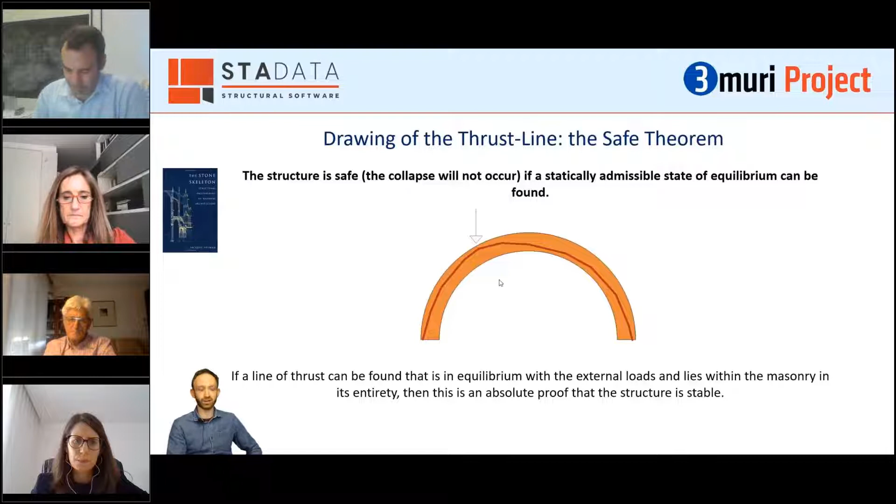So, in other words, this is the reason why Heyman called this the Safe Theorem: the structure is safe if we are able to find this internal distribution. This is the static theorem.

The Safe Theorem is at the base of the first analysis provided to the user in our Arch module, defined as thrust line analysis. This module allows you to obtain the optimized thrust line.

When I talk about the optimized thrust line, I need to take a step back, because the arch is a redundant structure. This means that the number of possible thrust line solutions is infinite. So what we provide to the user is the optimized one, the thrust line that minimizes the distance between the medium line of the arch and the thrust line itself.

It's a very useful tool because it's a fast way to notice locations that might suffer damage, and it's a fast way to understand the safety state of the arch.

The thrust line is not the only main output. First of all, it will be possible to input pre-existing cracks, which is very important, I would say, because when we deal with a real arch, cracks are often present. Then it will be possible to plot internal actions and internal stresses along with the thrust line, and as a main output it will also show the thrust at the springs.

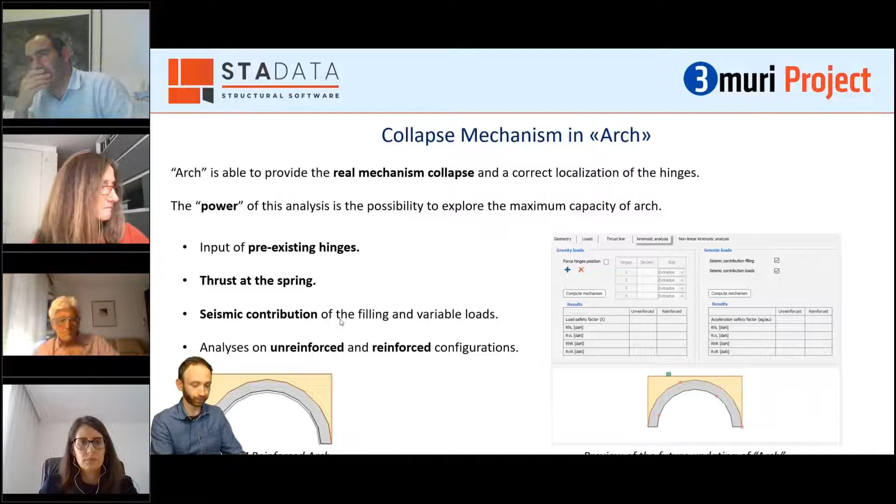Let's conclude the theoretical part citing the uniqueness theorem. The uniqueness theorem assesses that if you're able to find a thrust line that is internal to the arch, meaning it's an equilibrium state, but this thrust line touches the arch in 4 different points, leading to a mechanism, then that thrust line is unique. With our software, our module arch, this is possible.

When you compare the results using the static approach and the kinematic approach, you will be able to get the unique thrust line. This is important because it's a sort of internal validation of the software.

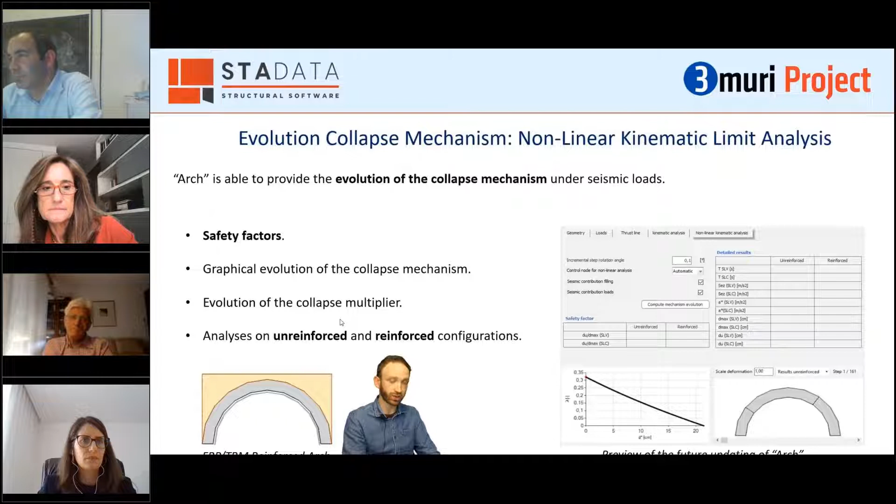Let me conclude with this last slide, which I mentioned in the first slides, related to the possibility to run nonlinear kinematic limit analysis. By nonlinear, I mean it's possible to track the evolution of the collapse mechanism under seismic loads. We have safety factors in terms of displacements, and the user can visualize the graphic evolution of the collapse mechanism and the evolution of the collapse multiplier. Even in this case, like before, it's possible to perform analysis on reinforced configurations.

With this slide, I finish this presentation. I hope it was interesting to talk about arches in general, and in particular our module arch, which I want to repeat will be updated soon. Thank you again for the attention, and I leave the desk to the next speaker. Thank you.

Okay, thank you for this interesting contribution. Jacopo, I think is online. Yes, thanks Professor. Thank you, Jacopo. Your presentation was really clear, and I think you've presented an interesting new addition to the 3muri Project package, and the development could go further, it's an interesting new feature. Then I think we can now continue with the Greek speakers.

We go to Stylianos Kallioras. He is Greek and a little Italian because of this. Yet adopted, exactly. And Stelios has been one of my PhD students. He did his MSc in Pavia, and his PhD at the Rose School in Pavia. Yes, correct. I've been working with Professor Penna for many years, and I've done a lot of research using 3muri.

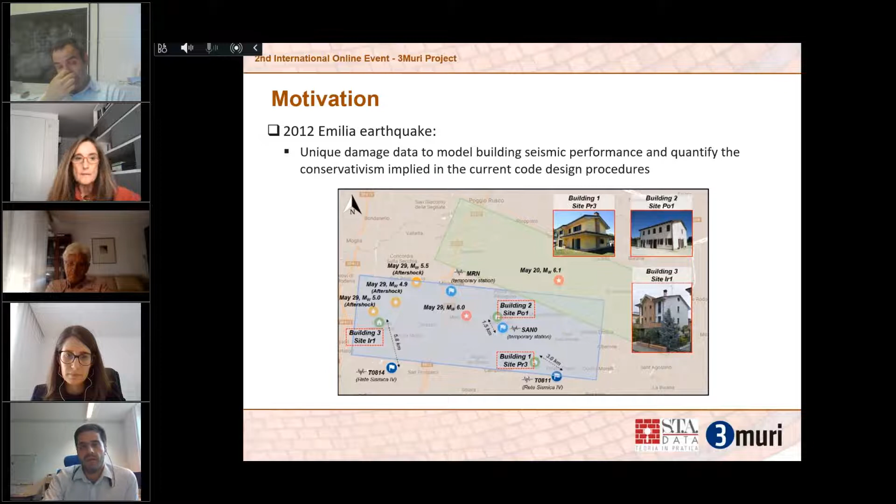So the study was articulated in many different phases. At first, we developed... do you see my screen?

My presentation? Yes, because my computer crashed. Do you see my presentation? You confirm that you see my presentation, right? Okay.

First we developed numerical models to carry out simulations of different earthquake scenarios for the 2012 Emilia earthquake.

Then we performed a fragility study based on existing analytical model-based procedures. We conducted a reliable probabilistic seismic performance assessment accounting for uncertainty in both structural capacity and demand. In the last step, we attempted to evaluate the safety margin provided by the current building codes. In this presentation, I will focus mainly on the first two phases of the work, which were centered around using the Tremuri software.

For the development of the study, we used the equivalent frame modeling strategy. Where possible, we adopt experimental data to update our models. We validate the models using empirical data by performing earthquake simulations, and we derive fragility functions using state-of-the-art procedures.

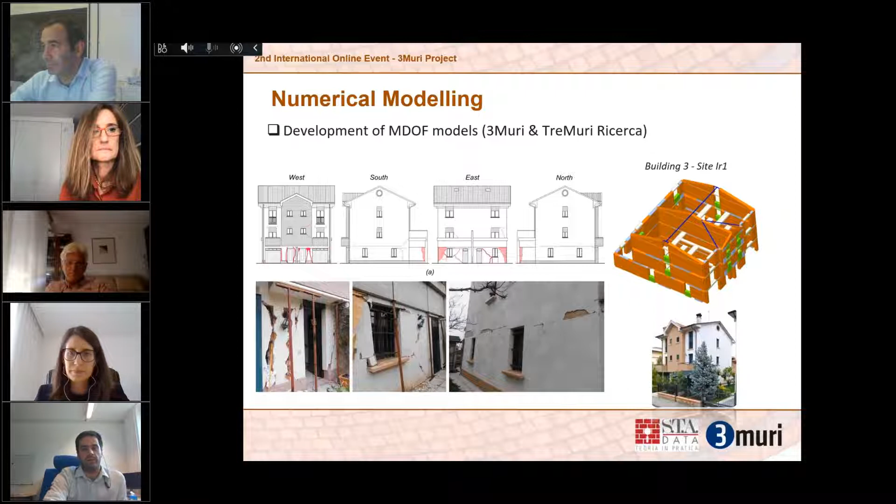Here you can see some of the damage observed in the third building case, which was severely damaged in the front and rear facades, which was also the weaker building direction.

For our modeling purpose, we use TreMuri Ricerca, the research version of 3Muri. Tremuri has been successfully used in numerous studies in the past. It has proven able to simulate with reasonable accuracy the dynamic response of entire buildings.

We adopt the frame type representation of the in-plane response of walls. The out-of-plane response was not explicitly accounted for in this case. Such an assumption was considered acceptable for the analysis of these buildings, where rigid diaphragms and low wall height-to-thickness ratios render the out-of-plane response a secondary concern.

Each wall is modeled by assembling piers and spandrel beams represented by two-node macro elements connected by rigid nodes. This is the nonlinear macro element model developed by Professor Andrea Penna and Stefano Bracchi. It has been improved significantly in recent years.

The macro element is divided into three parts: a central body, where only shear deformations are possible, and two interfaces, where external degrees of freedom are located and permit axial deformations and rotations with respect to the extremities of the central body. The flexural rocking response of the panel is represented adopting a unilateral contact model.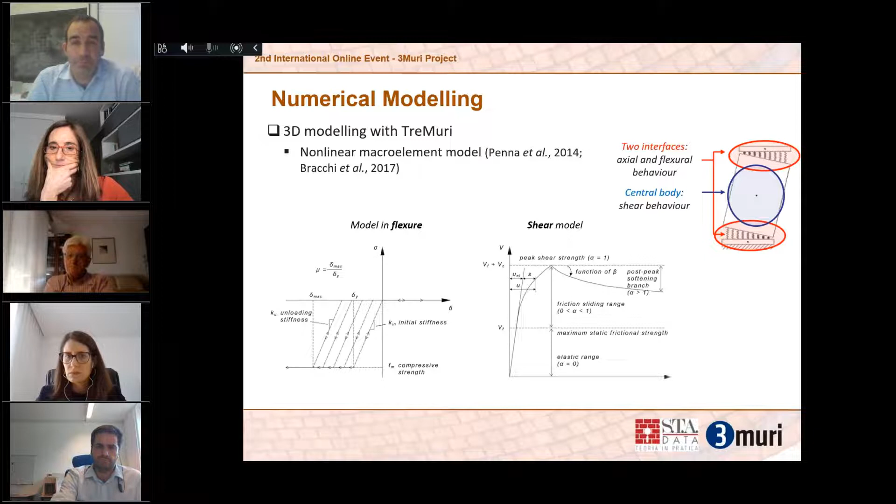The mechanical properties of the macro elements were updated from in situ tests. We performed some in situ tests for the determination of the mechanical properties of the masonry. Where possible, past experimental information was also used.

The macro element mechanical properties were based on mean values of the material properties. Drift limits were defined after statistical processing of experimental data, and the phenomenological parameters of the macro element were defined after model calibration against in-plane quasi-static cyclic tests performed in the lab.

We performed some pushover analysis to identify potential damage mechanisms and the most vulnerable parts of the buildings. For example, this is the first building that didn't exhibit any damage. You can see that the resistance of the building in the longitudinal direction is significantly higher than the transverse one, due to wider piers and greater gravity loads.

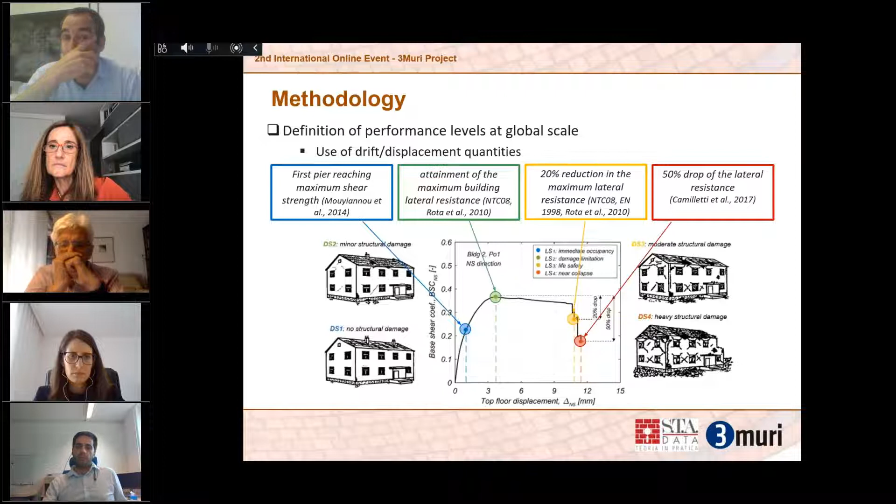With this pushover analysis, we later defined damage limits, consulting also criteria in the existing literature and in the norms. Based on these limit states, we later proceeded with performing fragility analysis.

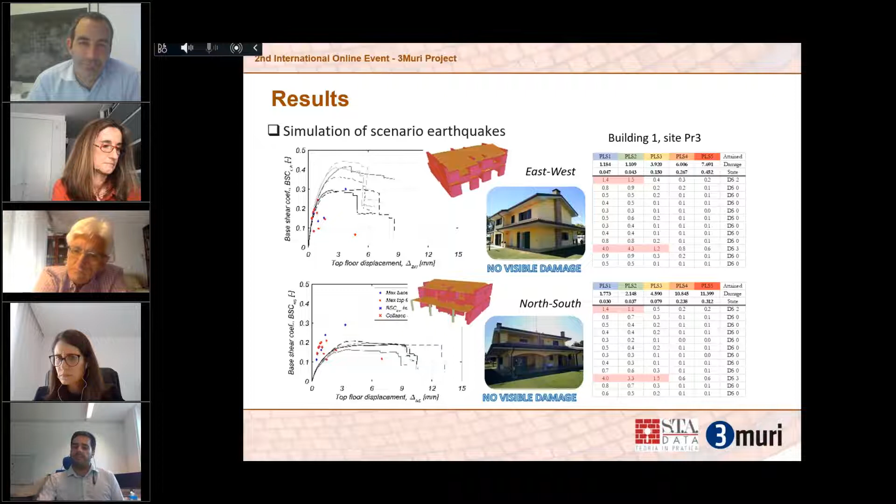Only in a couple of cases the seismic input seems to be a bit overestimated, and the model showed that the building manifests some slight damage. In building case 3, though, in almost all analysis, the model shows that the building suffered significant damage in its vulnerable direction.

We performed Monte Carlo simulations for the generation of a population of building models. The geometry was treated deterministically, while uncertainty was introduced by varying mass and mechanical characteristics that present significant variability. We also varied some drift limits for failure in shear and flexure and the vertical loads carried by the masonry piers.

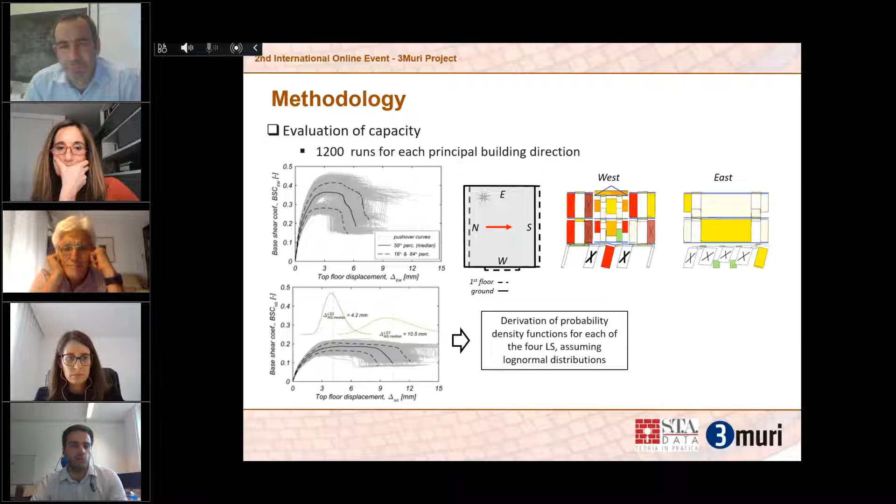I will not enter into details. We performed around 1,200 pushover analyses for each building direction. On the generated pushover curves, we identified damage limit states based on the criteria we discussed before. These limit state variables were summarized into an estimate of a central value and a measure of dispersion, and were approximated by assuming suitable parametric distributions, in this case log-normal distributions.

Using the earthquake accelerograms we saw before, we performed incremental dynamic analysis to come up with probability distributions of displacement demands. In our analysis results, we saw that the greater dispersion was due to record variability, while dispersion in displacement demands due to uncertainty in structural modeling parameters was really small.

Fragility functions were later derived by folding together probabilistic representations of capacity and demand using state-of-the-art procedures available in the literature. I will not enter into details. Let's take a look at the results.

Starting with building case 1. The building appeared to be weaker in the north-south direction. This is because, as we said before, of the orientation of the floor. So in the longitudinal direction, vertical loads sustained by the piers were greater, so greater was also the lateral resistance - wider piers, while in the other direction we had wider openings.

Based on the fragility analysis results, this building should suffer with relatively high probability slight structural damage in its weak direction. In reality, we didn't see any damage in the building.

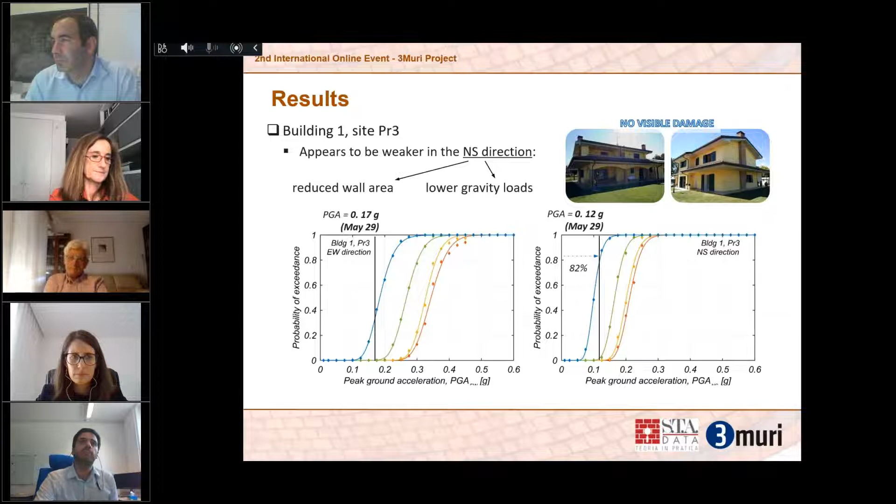Building case 2: also here, the fragility analysis showed some damage in both building directions, despite the fact that there was no damage in reality. This building was significantly more resistant in both building directions with respect to the other two building cases.

And this is building 3. The fragility analysis actually predicted damage in the weak building direction of the structure. In most of the cases, it's near collapse conditions, while only slight damage was predicted in the strong building direction.

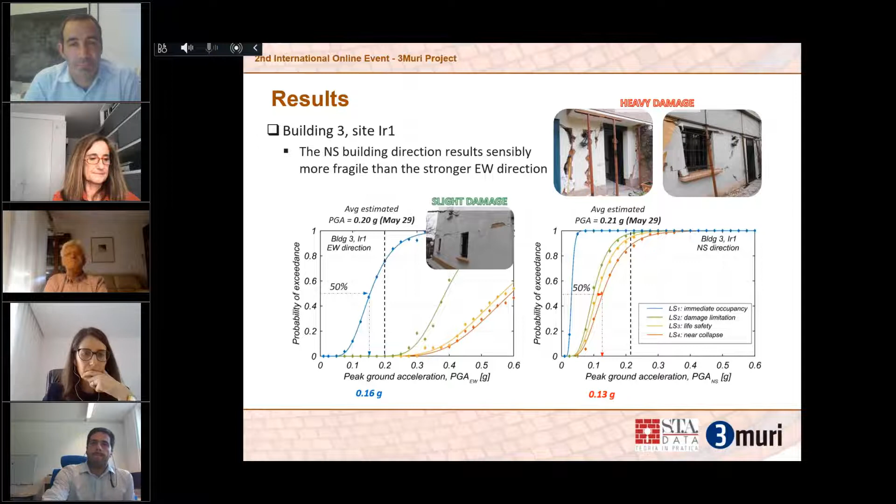So, after conducting this study, the models predicted quite accurately the damage seen in building case 3. Buildings 1 and 2 appeared slightly weaker compared to the observed seismic performance, but this conservativeness in the analysis results is most probably attributed to overestimation of the effective intensity of the seismic motion that we employed.

Possibly also conservative assumptions in the adopted material parameters, and the adoption of strictly defined damage limits or low ultimate drift limits associated with in-plane shear failure modes. Nevertheless, the study showed that TreMuri can be effectively used for probabilistic analysis using high quality data and seismic input.

The models in this case were validated with real earthquake observations, using empirical data from the Emilia 2012 earthquake, and the results are quite promising for similar studies of this type, for seismic vulnerability studies and seismic risk studies. These can be performed relatively fast with low computational effort and with quite high accuracy and reliability.

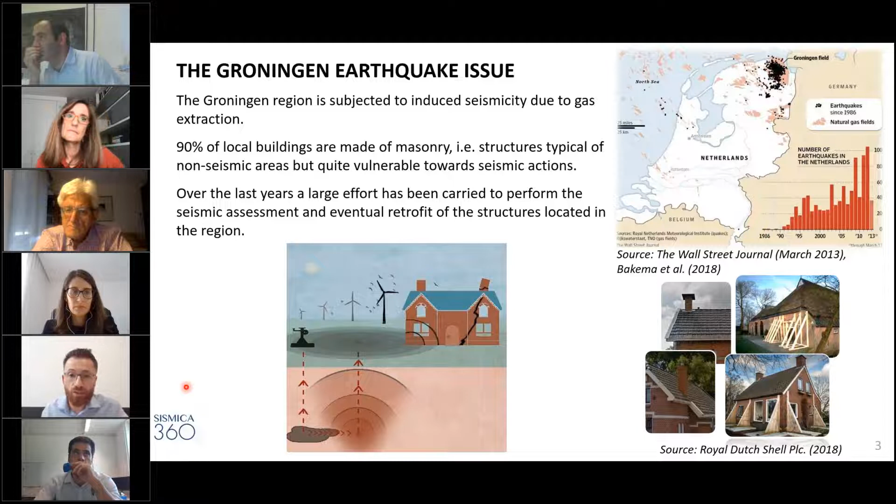As many of you may know, the Groningen region is located in the northeast of the Netherlands, and is quite peculiar because there is seismicity induced by gas extraction. The earthquakes there may not be major earthquakes as we're used to, for example, in the case of tectonic earthquakes. The problem is that the structures are particularly vulnerable, since they're designed only to withstand static loading. So over the last, I would say, more than 5 years, there has been a huge engineering effort toward the seismic assessment of the vulnerability of existing structures and their retrofitting.

It's also important to underline that due to the peculiarity of the problem, engineers in the Netherlands should use specific guidelines. So over there, we don't use Eurocode 8, but a specific guideline has been drafted, called NPR 9998, specific for the seismic assessment and design of structures located in the Groningen region. Another important thing to underline is that this guideline was first drafted in 2015 and underwent several modifications over the years. The actual version is the 2020 version, and over the years we observed quite a significant increase in the displacement capacity of structures when analyzed with nonlinear pushover analysis.

On the other hand, the seismic input of the region is defined starting from what is called the NPR web tool, and on the input side there was also a significant variation over the years. Why? Because the extraction of gas was reduced, so the seismic input was reduced too. It didn't reduce evenly across the region—there was a more significant reduction in the peripheral areas. So the peculiarity of the Groningen problem right now is that the same structure assessed 5 years ago versus right now would have quite a significant different outcome, due to, on one side, the increase of capacity, and on the other side, the decrease of demand.

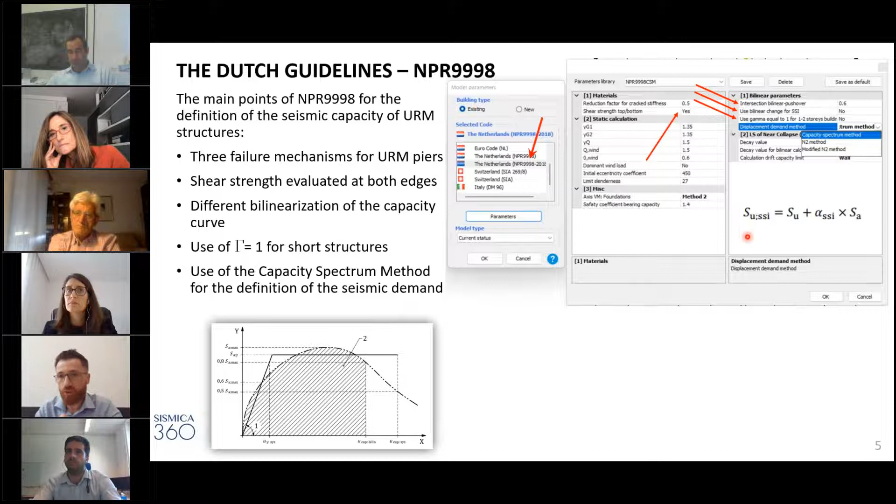Another important thing is that the Dutch guidelines underline that the seismic assessment of the structure should be performed with the capacity spectrum method.

Now it's important to say that this method was originally conceived for design and not for assessment, so there are some issues. I won't go into detail in this presentation, but there are some issues when using this method for seismic assessment.

Also, there is the possibility in 3Muri with the Dutch guidelines to use the N2 method, which we are all familiar with, but also the modified N2 method.

This modified N2 method was developed at the University of Pavia by one of the postdocs of Professor Andrea Penna, Dr. Guerrini. This method basically corrects for the fact that usually with N2 methods we tend to underestimate the displacement demand for really short period structures.

So these are, I would say, the main points to underline about the Dutch guidelines, and all these points are integrated into the commercial version of 3Muri.

As I said, the structures in the Groningen region are quite vulnerable, for several reasons. For example, they have big openings, they have cavity walls, so double walls with a void between the two leaves where the outer leaf is non-structural, and some of them have quite peculiar configurations due to the fact they are agro buildings, so farm buildings.

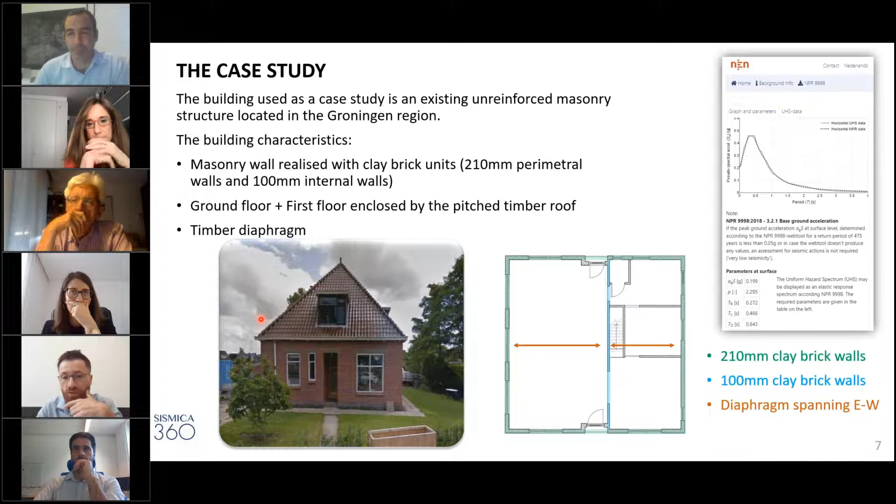We have a first floor, but it's enclosed by the pitched roof, so we have no structural masonry there. We have 210 masonry walls on the perimeter, a main inner wall 100 millimeter on the Y direction, no structural walls internally in the X direction, and this is the spanning of the diaphragm. The diaphragm can be considered rigid because there was previously a stiffening intervention with OSB panel.

So we perform the seismic assessment using the capacity spectrum method in the actual condition of the structure. First of all, I would like to underline that due to the code as it is, we can obtain significantly larger displacement capacity for the structure. So if we run the analysis, we obtain this point, 42 millimeter, as ultimate displacement for the structure.

The truth is that particular attention must be paid by engineers if there is local instability or collapse of some elements which can trigger local collapse of the structure. For example, in this case, we can see this pier here on the right-hand side, which corresponds to this corner, which is actually collapsing at this point. So we stop the analysis here because we consider that the failure of this element could trigger local collapse of the roof, since the roof is supported by the perimeter walls.

So particular attention has to be paid when using this code, especially because it's pushing a lot the capacity in terms of displacement and to the 50% drop. We can also see that the drop here corresponds to more than 20% drop with respect to the maximum shear capacity, so these results are more in line with what we would obtain with the Eurocode.

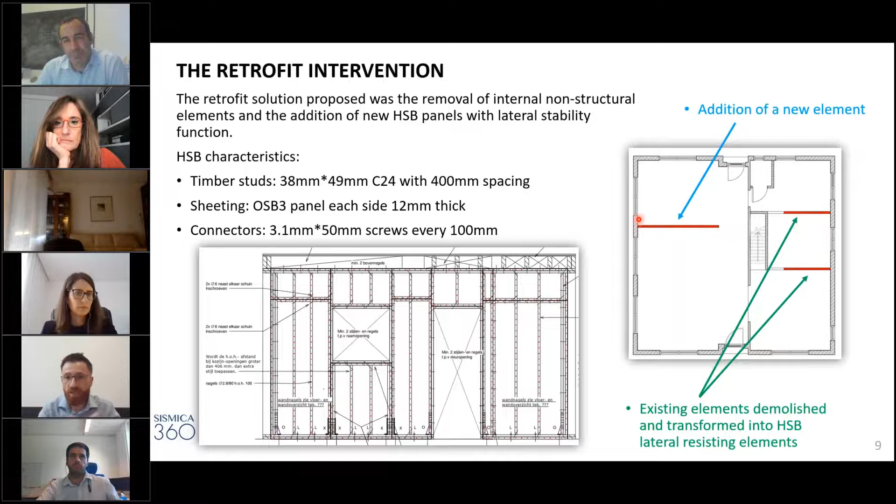As I said, the idea is to use timber panels to improve the seismic stability of the structure. So the idea is to replace 2 non-structural walls with new HSB walls that will be properly connected to the foundation and to the existing diaphragm, and then to change the internal configuration of the structure on the left-hand side, adding a new HSB panel. This will allow us to have enough length of panels to resist seismic forces.

So the interesting thing here is how to model this panel. There is an MSc dissertation which explains how to account for this HSB panel. Basically, the timber panel is turned into an equivalent element, an equivalent frame, you can say, where we have some rigid elements hinged at the extremities that define the geometry of the panel, and then we have a diagonal, which is actually the element that controls the lateral stiffness and strength of the panel.

The definition of the diagonal depends on several factors, this is the formula. The most important are the fasteners: whether you use nails or screws, the spacing, and also the sheeting, hold down, slide down, stud, and the connectors. Anyway, with this transformation, we can define an equivalent panel for each panel.

And so this is the model, and now we have implemented the solution in 3Muri. You can see we have the equivalent panel realized by rigid elements. Then we define the diagonal in order to define the proper lateral stiffness and strength for these timber panels. It's important to underline that we had to introduce some offsets, which are rigid elements hinged at their extremities, in order to avoid introducing parasitic moment and forces into the model, and have only shear going into the equivalent panels.

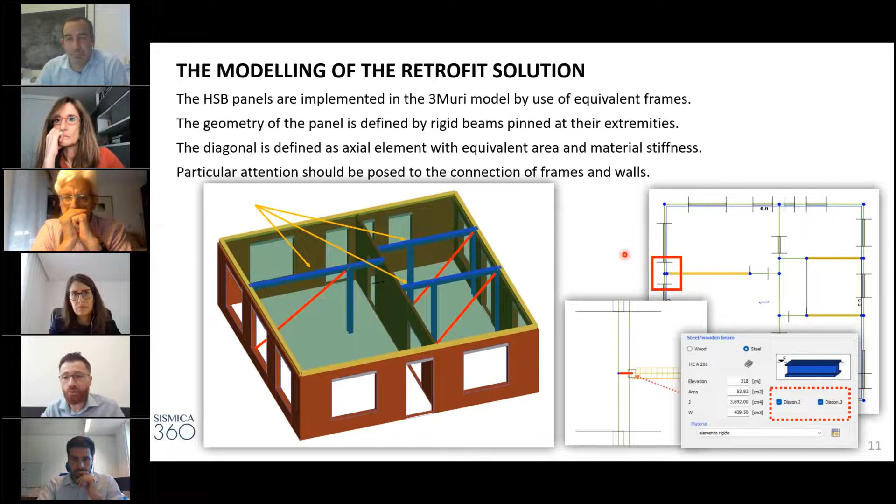So here we can see the results of the stiffened structure. We can see right now that all the analyses are verified. I think the most important thing is to compare the pre and post retrofit intervention and compare the two curves.

I must underline, this intervention does not affect the masonry. In fact, we see that the ultimate displacement capacity of the pre and post intervention is actually the same, because it's controlled by the failure of this element here. What is affected is the shear capacity, which increases significantly, and the period of the equivalent structure.

We can see that the curve of what we could call the hybrid structure is quite peculiar. So we have the first phase where we have loading of the masonry, and then when we start cracking the masonry, we activate the timber panels.

For this type of structure, it's non-trivial to define the equivalent period of vibration, because if we run a modal analysis of the two models, we obtain exactly the same period, here 0.12 seconds. But due to the bilinearization, the equivalent bilinear curve has a significant difference, so we have 0.1 second in this case and 0.3 second in this case.

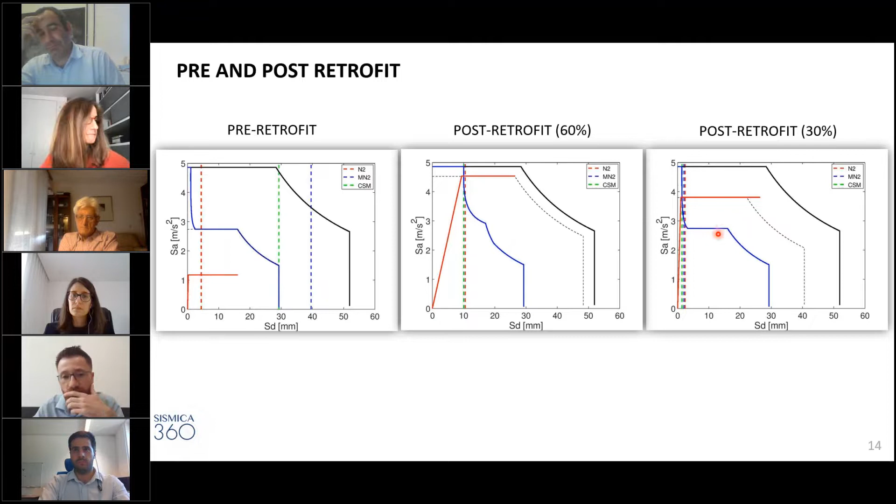And the last thing I would like to say: using the capacity spectrum method is sometimes tricky for seismic assessment, because you can see here that when we have acceleration capacities which are around the plateau for the maximum reduction — this is maximum elasticity — you can obtain quite a big drop or increase in the displacement demand, which means that a tiny difference in the acceleration capacity could induce big differences in displacement demand.

This last slide is to conclude, to compare the pre and post intervention. With the three methods, this slide just underlines what I said before, that this retrofit intervention turned out to be effective for the strengthening of the structure, and still there are some questions when using the three different methods, and particular attention should be paid in choosing when to use them.

With this, I conclude my presentation. Thank you all for the attention.